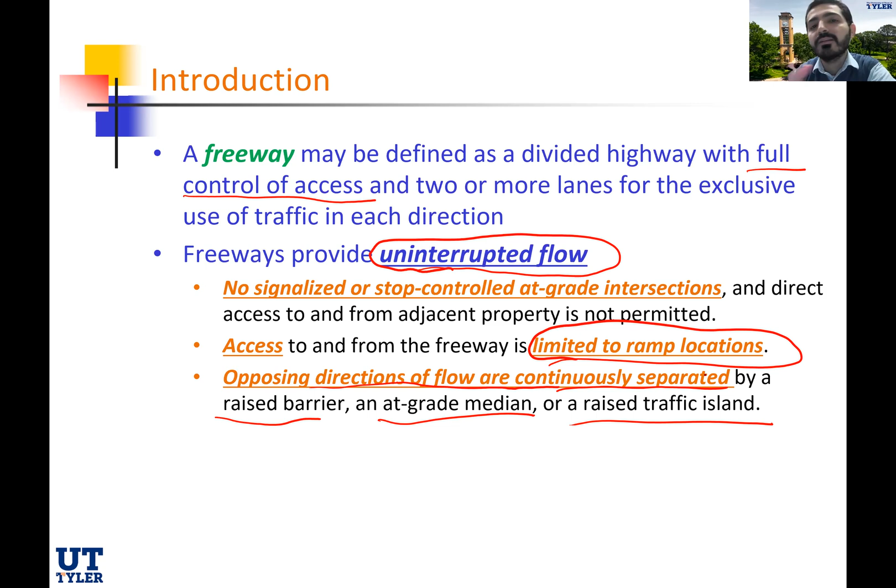The access to and from the freeway is limited to the ramp locations, as well as the opposing directions of flow being continuously separated by either a raised barrier, an at-grade median, or a raised traffic island. So if you are driving on that freeway, you do not care by any means what's going on the other side - there is a big physical barrier between the opposite directions, and that's how we define a freeway.

So operating conditions on freeways are actually dependent heavily on characteristics of the roadway as well as the interactions between the vehicles within the traffic. It doesn't depend on the traffic control - there are no traffic signs, no traffic signals, no stop signs, no yield signs. The main operations and the quality of the operation on freeways highly depend on the characteristics of the roadway itself, how good the roadway is, and also the interaction between the vehicles on that freeway.

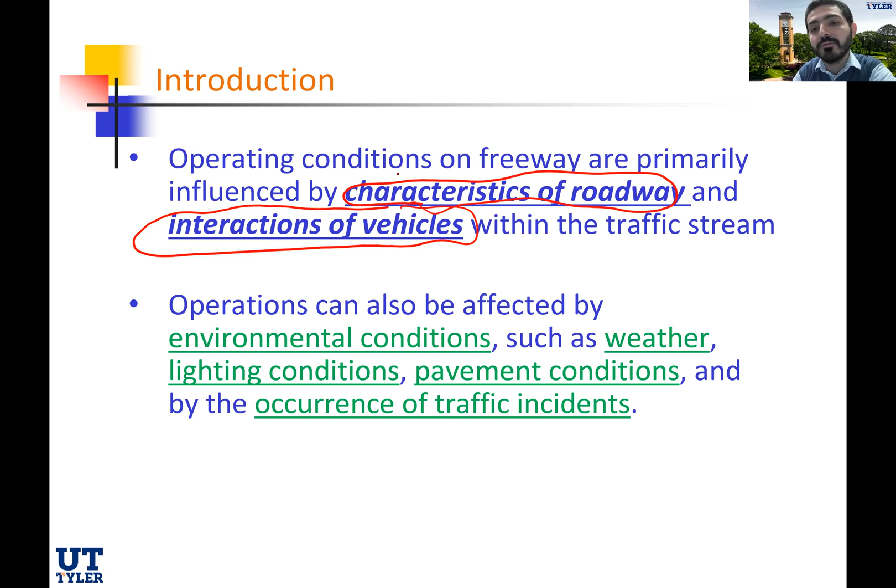So operations can be affected by environmental conditions - if it's an icy condition, snowy condition, rainy condition, windy condition, that also can make a big impact on operations, such as weather or even lighting conditions. Sometimes driving at night on a freeway, your experience is going to differ if there's enough lighting or not, and therefore the level of service eventually on this freeway will change and will be highly affected by changing the lighting conditions.

Also, pavement conditions - the pavement itself, the surface. Is that surface of the pavement a rough surface or a smooth one? If there are lots of cracks, lots of rutting, lots of distresses, that's also going to affect what's the level of service on this freeway. And of course, the occurrence of traffic accidents, or to be more generalized, any incident that happens. If we have lots of incidents that happen on this segment, known to be highly dangerous, then the level of service also will go down.

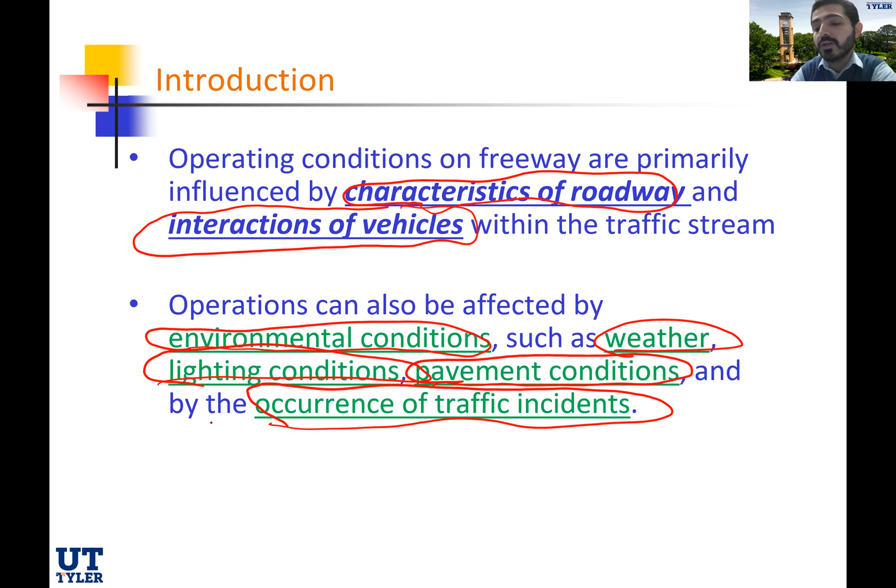So speaking of a freeway, any freeway actually consists of three component parts. The first part is what we're going to call the basic freeway segment, and then we're going to have weaving areas, and then we have the merge or diverge areas.

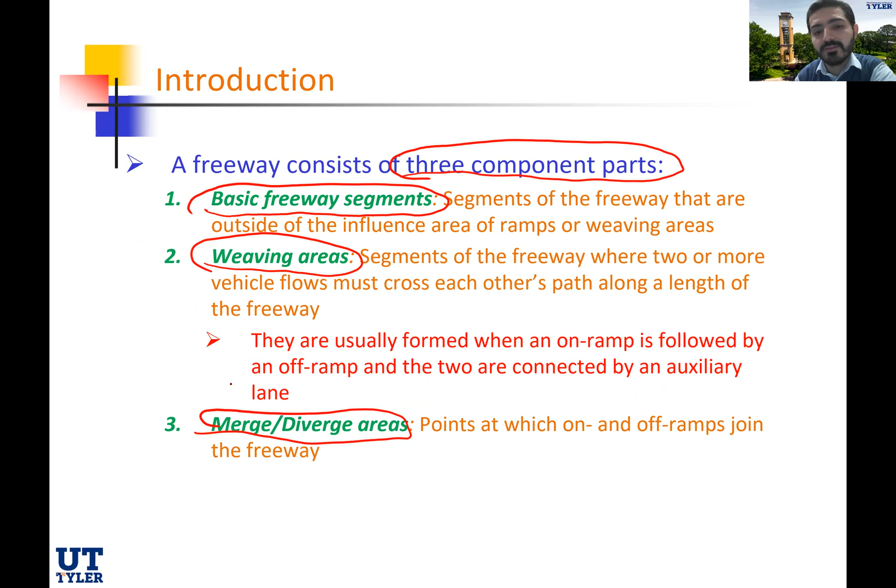It's a continuous stretch with no interruptions, except if there is an incident that happens. So this is the basic freeway segment. By definition, these are segments of the freeway that are outside the influence area of ramps as well as weaving areas.

The weaving areas are the segments of the freeway where two or more vehicle flows must cross each other's path along the length of that freeway. These are usually formed where an on ramp is followed by an off ramp. If the on and off ramp are very close, you're going to see vehicles trying to enter and trying to exit the highway, versus others trying to speed up to enter the highway, so we get a conflict of interest.

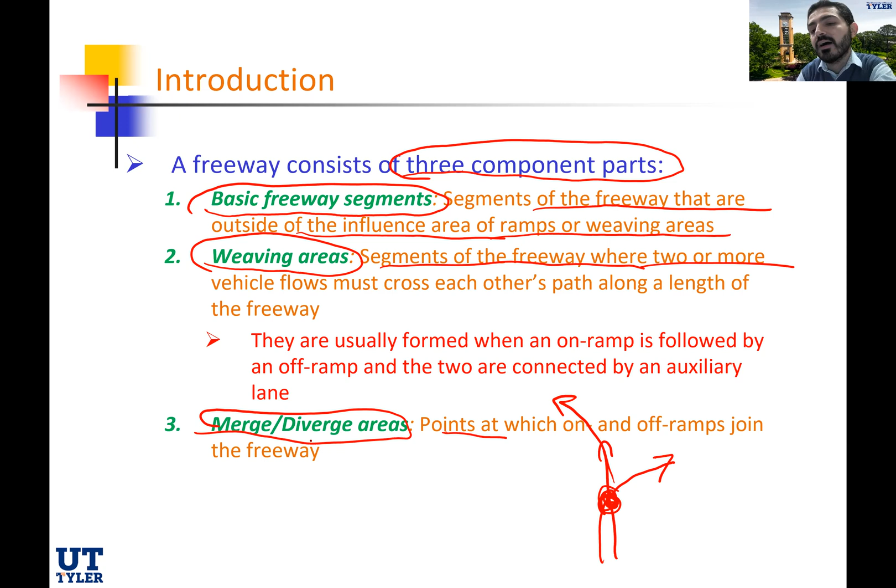Some vehicles are trying to get in, and some are trying to get out, and that is one of the most dangerous locations in any freeway, the merge or diverge. These are the points at which on and off ramps join the freeway. So those are the three major segments of any freeway.

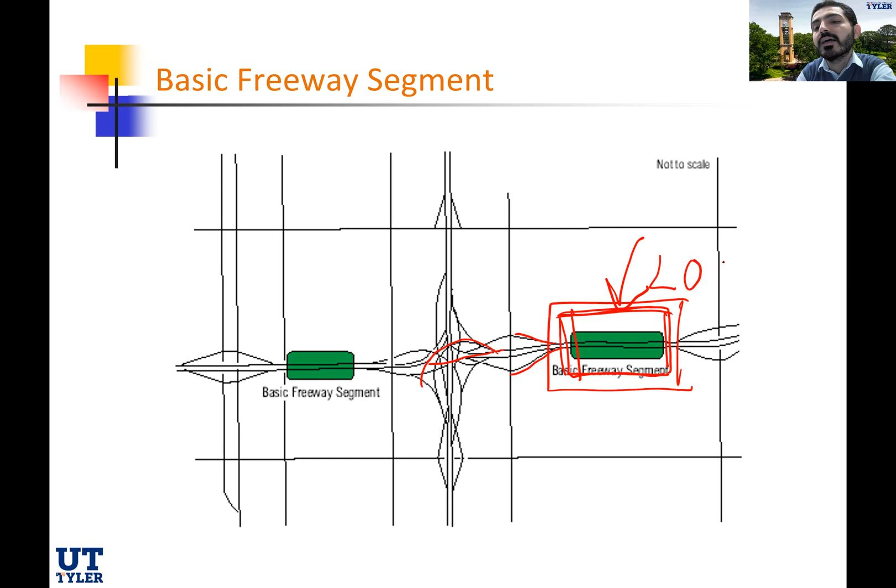You may agree or disagree, but to be fair, when determining the level of service for any freeway and comparing different freeways, we tend to pick the basic freeway segment to judge the true level of service for this freeway. A basic freeway segment is typically characterized by three main performance measures, which we look into once we pick that segment.

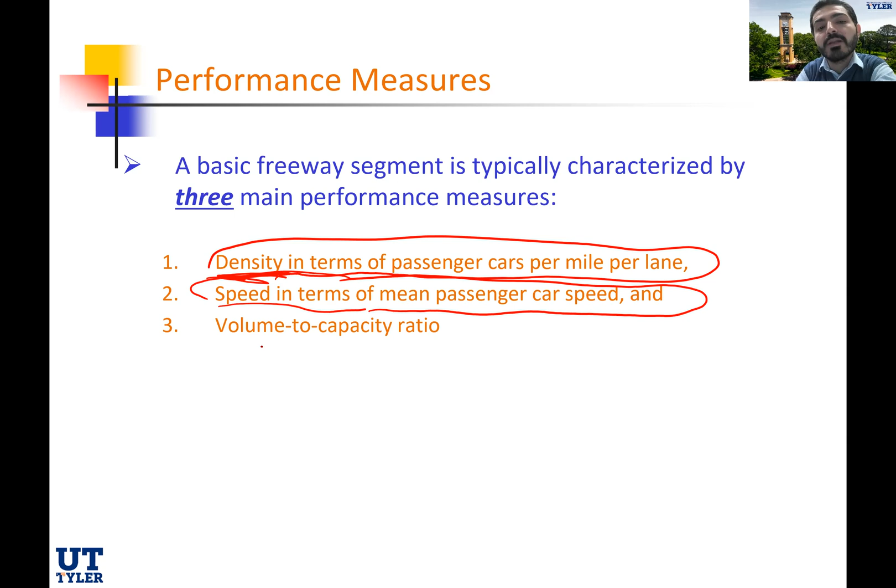One of them is density, which we defined in the previous chapter, in terms of passenger cars per mile per lane. Then there's also speed, in terms of mean passenger car speed, as well as the volume to capacity ratio.

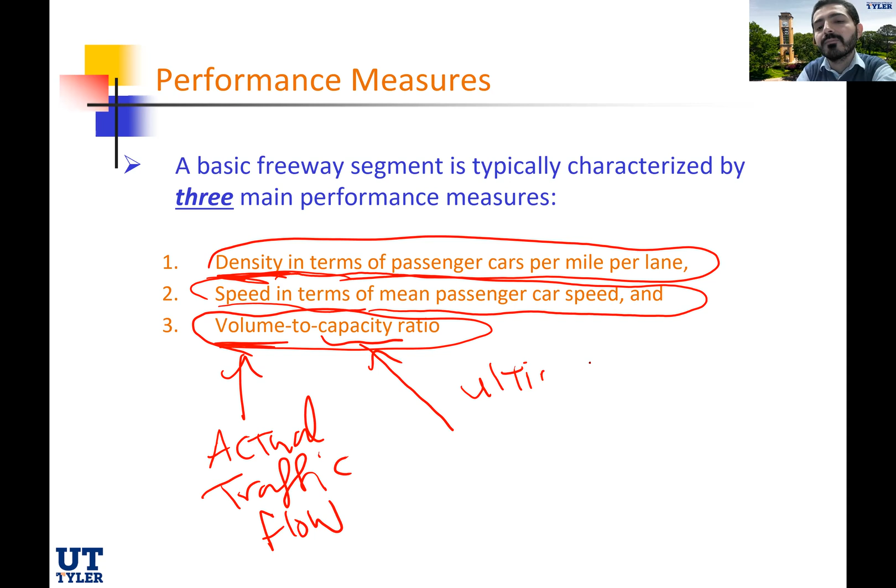Volume to capacity ratio is similar to how far we are from the ultimate strength of a steel sample, for example. The volume is the actual traffic flow, whereas the capacity is the ultimate traffic capacity or the ultimate traffic flow possible.

So let's start from the very beginning. Density: if I'm driving on a freeway and the density is high, the level of service will go down. If the density is low, that means there's not much passenger cars per mile per lane, and the level of service, your experience as a driver, is going to be way better.

Speed also matters, and we define something called FFS, free flow speed. If your free flow speed is high, the level of service will be high, an A or a B. But if the free flow speed is significantly low, because it's affected by other factors, then the level of service, your rideability on the freeway, will be low.

Same thing with the third item, volume to capacity ratio. If you can handle, let's say, 2,000 vehicles per hour per lane, that is the capacity. If the real volume is 1,000, then the ratio is 1,000 over 2,000, that's 50%, which is great. But if the actual traffic flow is 1,900, then 1,900 over 2,000 is 0.95, or 95%, so now we're reaching the capacity.

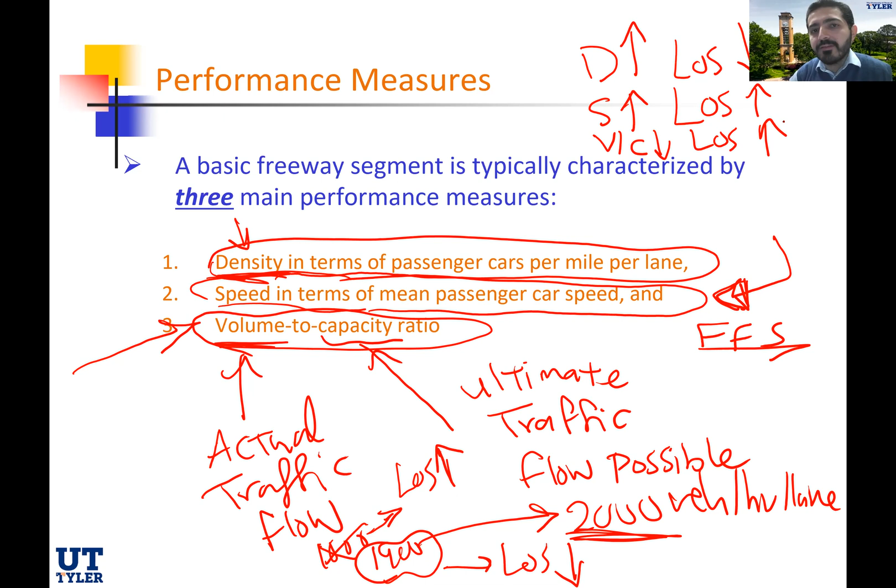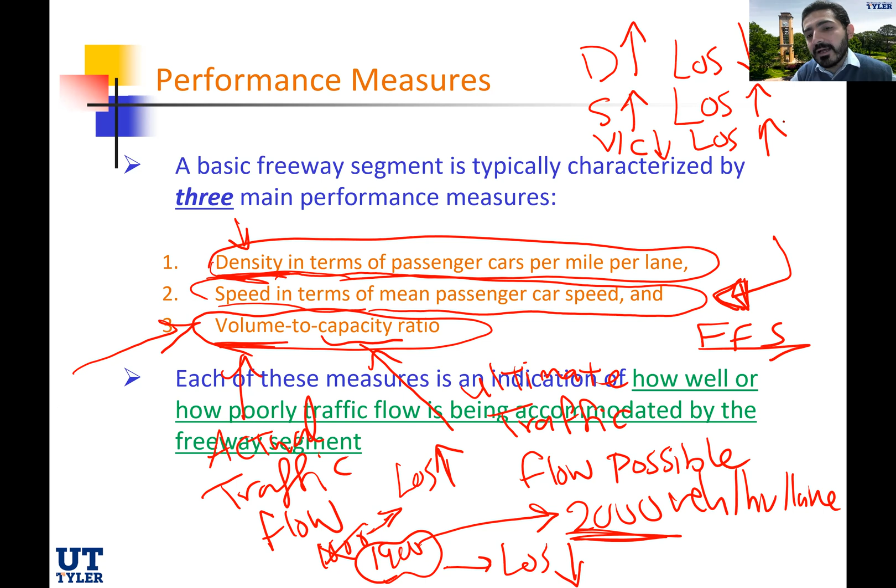Let's get into more details on how we can get the actual level of service for any freeway we're interested to analyze. Each one of these measures is an indication of how well or how poorly the traffic flow is being accommodated by the freeway segment.

So this is the service measure - how are we going to measure the level of service? You may think that if the traffic speed on a freeway segment is high, the level of service is going to be high. I'd tend to agree - it's a major indicator of the quality of driving at that location. But there are other factors that affect level of service, such as the freedom to maneuver within the traffic stream and proximity to other vehicles.

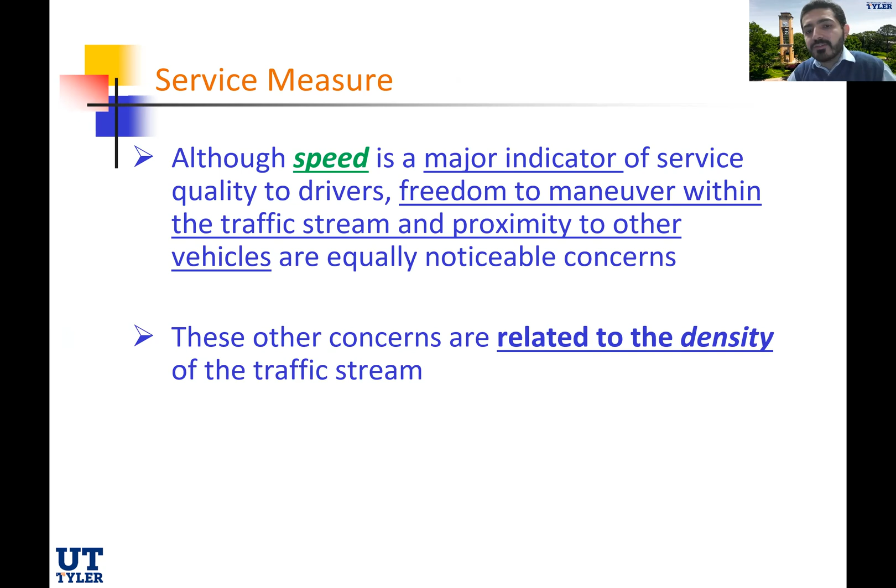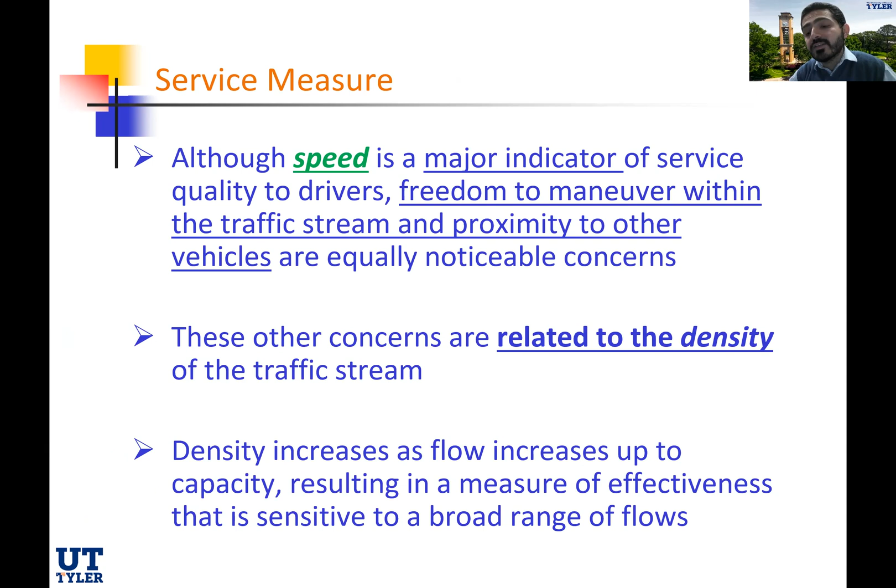These other concerns are related to the density of the traffic stream. The density increases as the flow increases up to capacity, as we've seen in chapter 5, resulting in a measure of effectiveness that is sensitive to a broad range of different flows. So for all of these reasons, density is the main performance measure used to define the level of service for a basic freeway segment.

If I have a density of 11 or less passenger cars per mile per lane, the level of service will be A. If the density is somewhere between 11 and 18, which is higher, the level of service would be B. If I have, say, 35 to 40 passenger cars per mile per lane, that's level of service E. And if it's more than 45, this is a big troubled freeway segment with level of service F, and some attention needs to be drawn at this location.

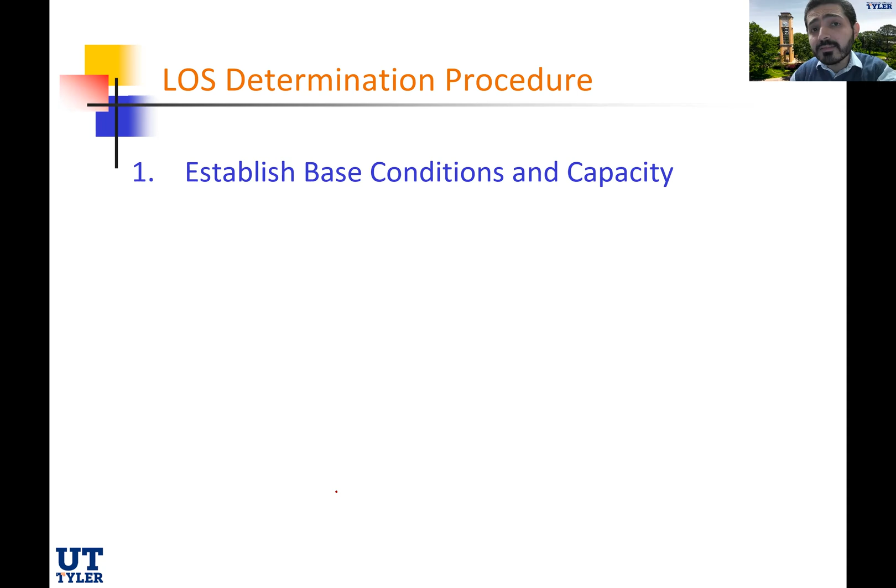So what is the mathematical procedure to determine the level of service? First, we need to establish base conditions and capacity. Instead of going straight through the calculation, we define some base or ideal conditions. If these are found on any freeway, the level of service is already predetermined as level of service A, or grade A. If not, if any of these conditions are not met, then you've got to go through the calculations.

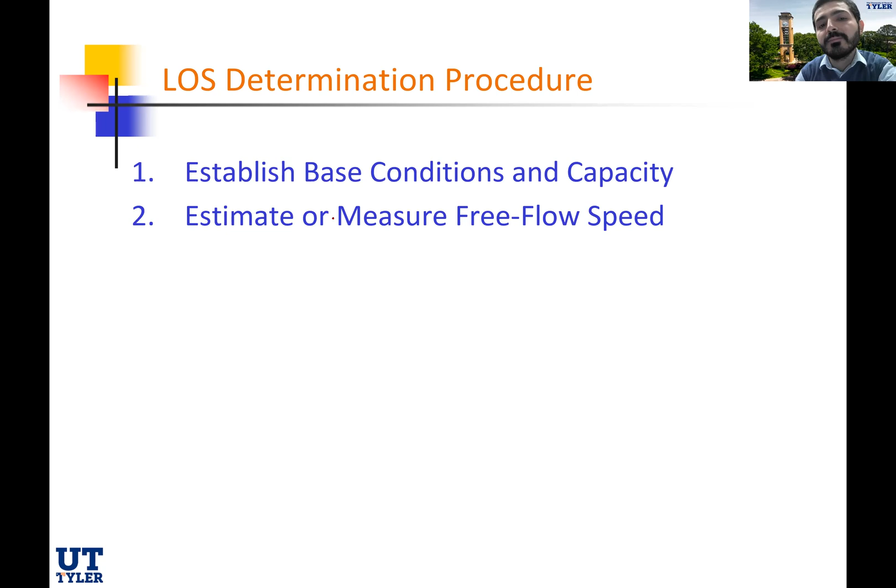The calculations include estimating or measuring the free flow speed, FFS, and measuring the flow rate, or what we call the analysis flow rate. So if you get the flow and the speed, you'll be able to get the density, and from there you'll be able to determine the level of service.

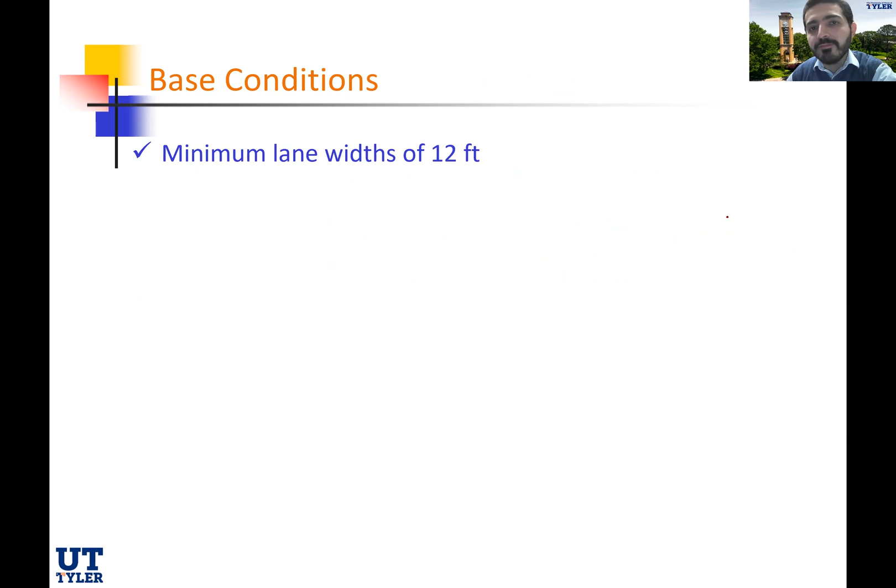So, what are these base conditions? If you were to design a freeway with level of service A, what would you expect to see? The first condition is we need a minimum lane width of 12 feet - any lane on the freeway has to be at least 12 feet in order to consider it level of service A.

Next is the minimum right shoulder lateral clearance between the edge of the travel lane and the nearest obstacle or object influencing traffic behavior, which should be at least 6 feet. Let's draw one direction, assuming there's a physical barrier between the two directions, so I have two lanes here. The first condition is I have to have a minimum of 12 feet. Then between the edge of the travel lane all the way to the next obstacle, which is the shoulder, minimum at least 6 feet. If I have 6 feet or higher, this is awesome - I'm meeting the level of service A condition.

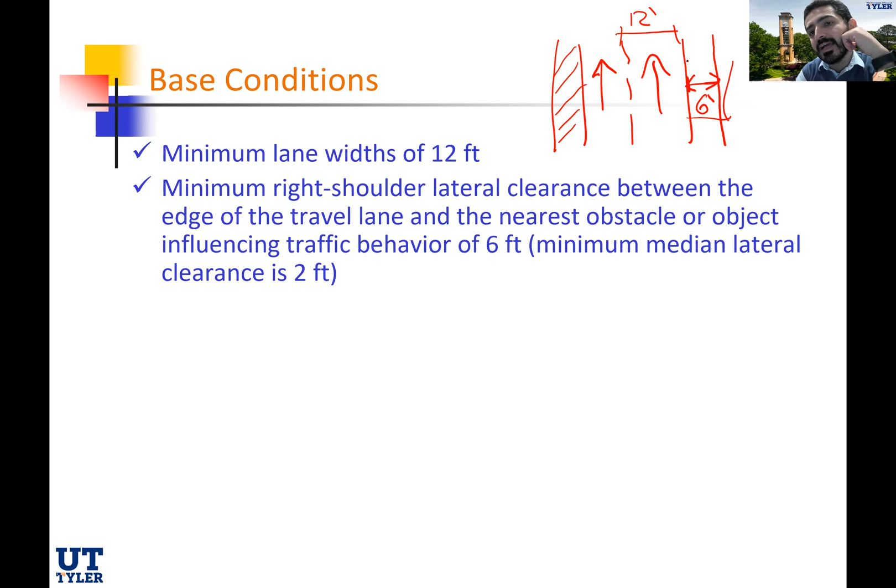We also have to have a minimum median lateral clearance of 2 feet. But typically we don't care about the median because, by definition, freeways have wide medians. So the main concentration is really, do I have a right shoulder width of a minimum of 6 feet or not? Also, I have to have a traffic stream consisting of passenger cars only. I know this is too ideal, but this is how we define level of service A - if almost 100% of the vehicles driving on this freeway segment are only passenger cars, no big trucks, no 18-wheelers.

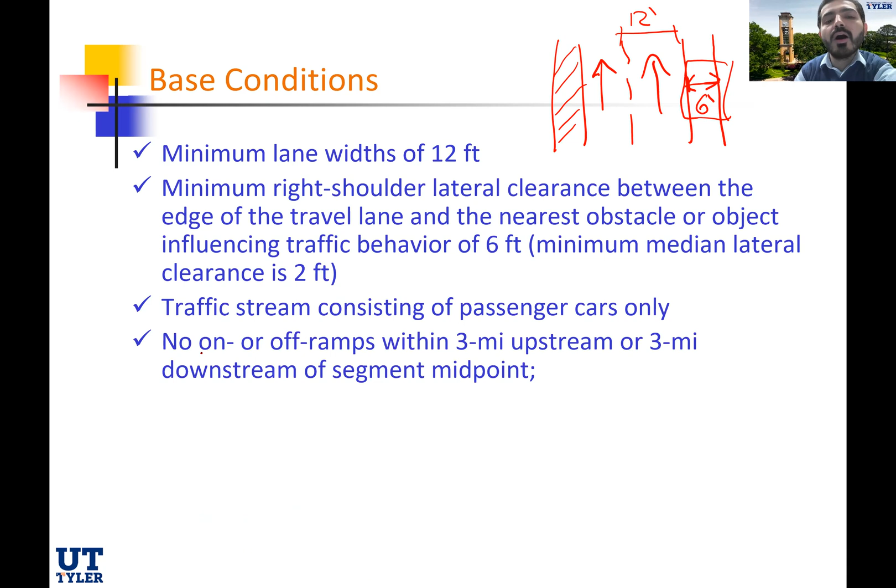If that's the case, we're still continuing with the assumption that the level of service is A. Next, there should be no on and off ramps within 3 miles upstream or 3 miles downstream of a segment midpoint. If we have too many on and off ramps, more than 6 total between upstream and downstream, then we're deviating from level of service A. The lesser the ramps, the more continuous the flow, your driving experience will be much better, and therefore the level of service will be A.

We also have to have level terrain with grades not greater than 2%. So you're not really climbing - I'm talking now about the vertical alignments, the G, remember when we did the crest vertical curves or sag vertical curves. The maximum should be 2%, either going up or going down. If it's more than 2%, your speed is going to start being significantly lower just because you're climbing, and therefore the level of service is going to deviate from level of service A.

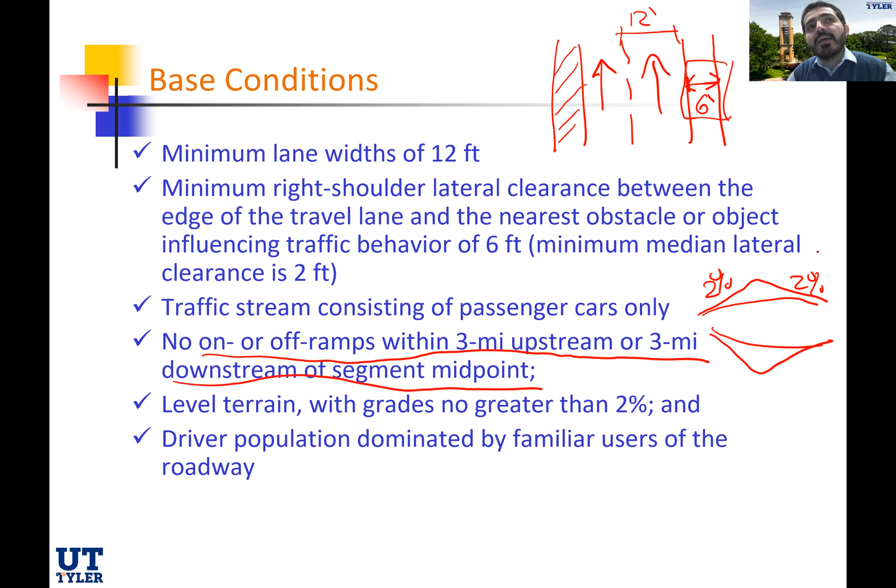Next is driver population dominated by familiar users of the roadway. That means you're hoping that 95% of the drivers on that freeway are using it on a daily basis and are fully aware of any horizontal or vertical alignment changes, and therefore they won't have a significant drop in speed at certain points that may affect the level of service.

However, on the other extreme case, if this freeway leads to a national park and 50% or more of the people using it are first-time users, they are more curious and more cautious. They don't know the bends of the roadway, so their speed is going to be lower, and therefore you'd expect the level of service to be lower just because there are lots of first-time visitors using this freeway, which lowers their speed and therefore the level of service.

So in theory, if you satisfy all these conditions - wide lanes at least 12 feet, wide shoulder minimum 6 feet, traffic only about passenger cars with no trucks lowering overall speed, a low amount of on and off ramps, vertical alignments of maximum 2% ups or downs, and most vehicle drivers familiar with the roadway - then satisfying all of them leads to level of service A. If you do not satisfy any of these conditions, you have to go through the calculations, and you know you are not going to be at level of service A.

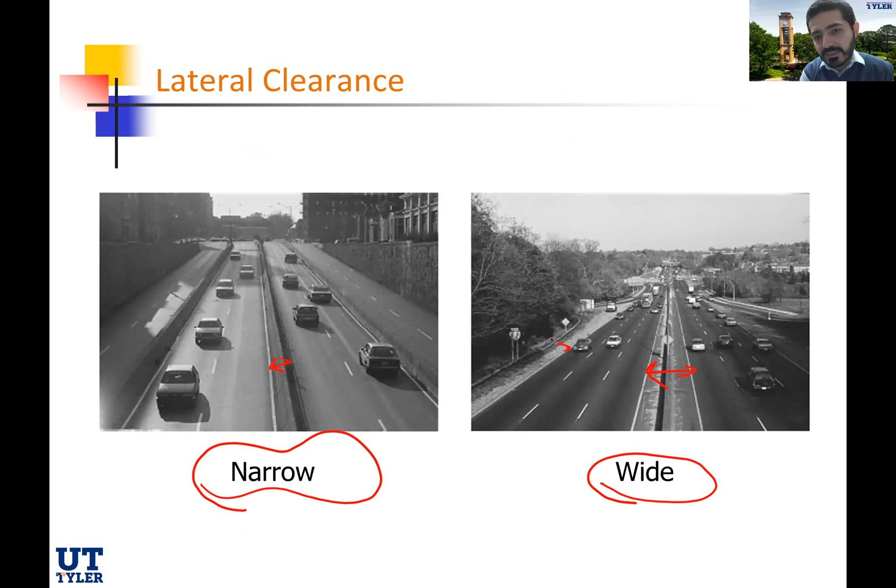So assuming that you're not going to have level of service A, here's an idea of the lateral clearance I was telling you about. This is a wide lateral clearance versus a very narrow lateral clearance. Even between opposite directions, this is very narrow, and here there is a distance versus here barely not much.

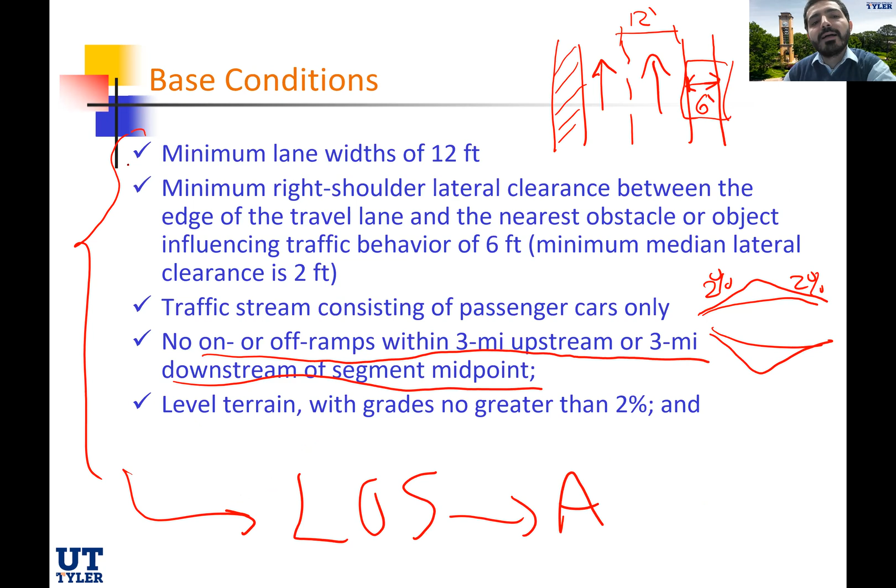Okay, going back to here, we said these are the steps. First, I need to check the base condition. Let's assume you did not meet the base condition. Then you need to go through the three other steps, steps 2, 3, and 4, to calculate the level of service. The first step, number 2, is we need to estimate or measure the free flow speed.

So how can we do that? This is what we're about to say. So the free flow speed, let's first redefine it. The free flow speed is actually the mean speed or average speed of passenger cars measured under low or moderate flow rates.

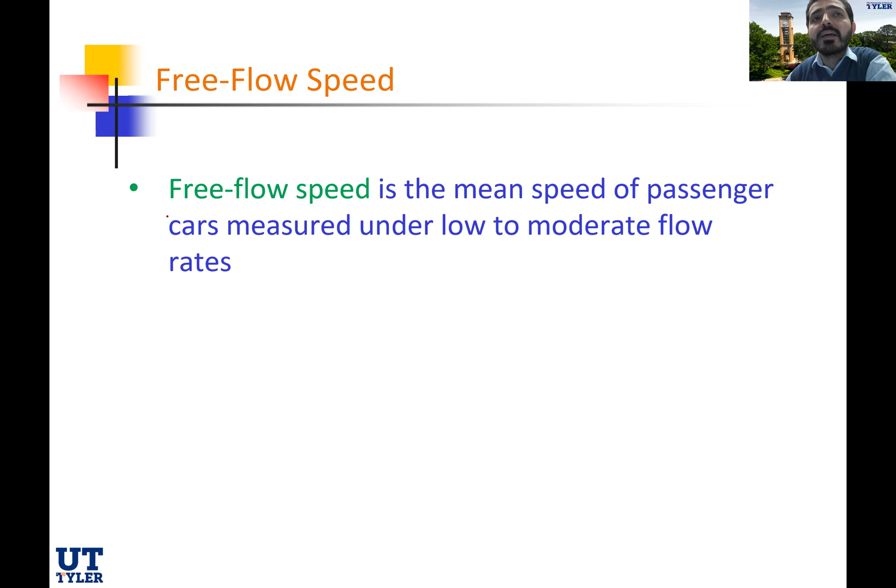So the interest here is if there are almost no cars or a very minimal amount of cars, and the vehicle drivers are picking their own speed, what would that free flow speed be? So to measure it, there are two methods that can be used to determine the FFS.

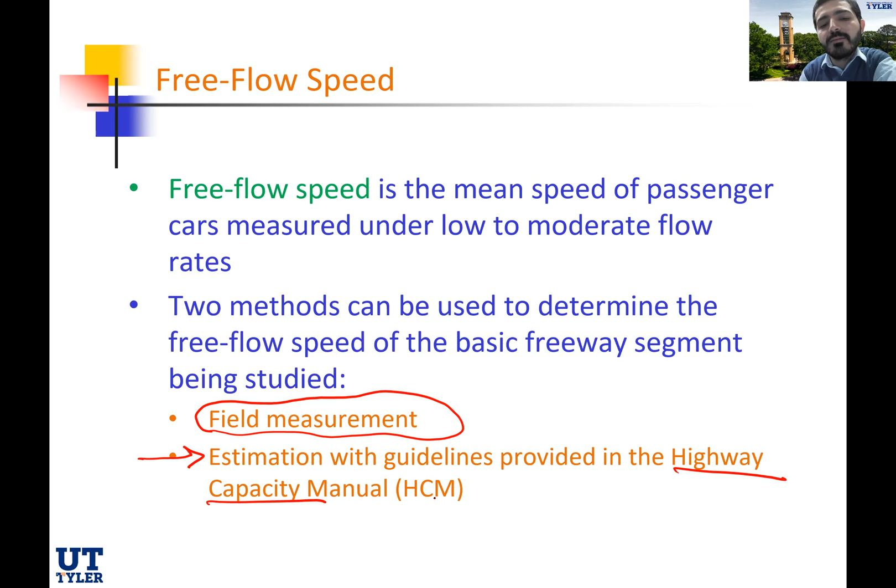We can do field measurements, or we can estimate it using the Highway Capacity Manual, HCM. Please pay attention to that, sometimes they ask about it in the second exam. What's HCM? It's a Federal Highway Administration publication called the Highway Capacity Manual, that gives us the tool to estimate the free flow speed if we do not have what it takes to measure that free flow speed in the field.

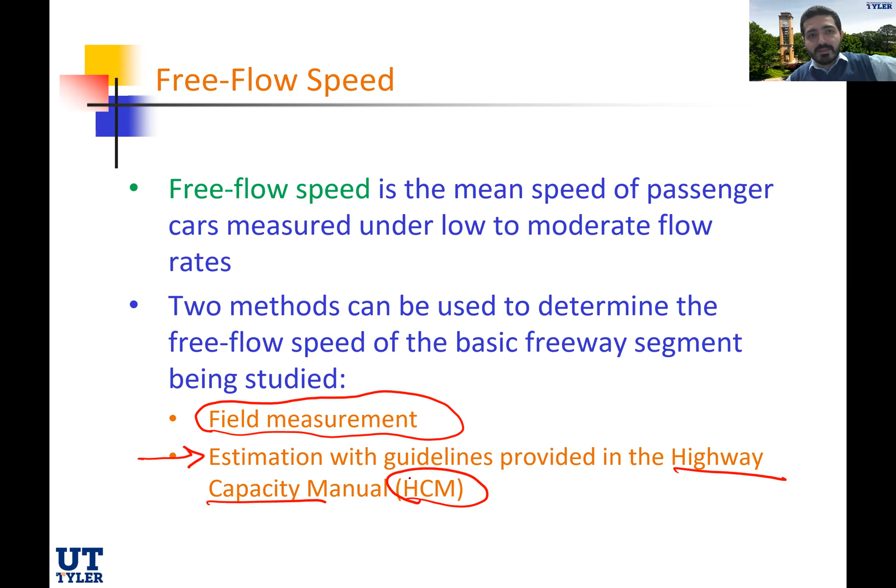So how can we estimate it? Again, measuring it is easy. You're just gonna go there and measure. You're gonna sit there maybe for a certain amount of time, observe a certain number of vehicles, sum them up, divide them, and get the average speed, and that will be your free flow speed.

But if you want to estimate it, this is the equation to estimate the free flow speed. It's a very theoretical equation, that's why it will be provided to you in the exam if you need it. Basically, let's take a look at how to estimate it. The free flow speed is mainly 75.4 miles per hour, minus a couple of factors here, and we want to study these factors.

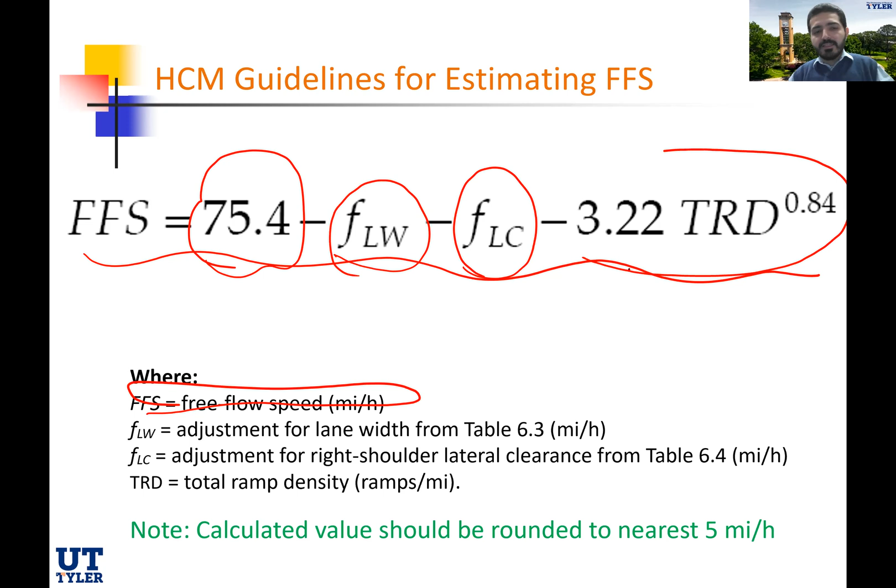The first one is FLW, this is an adjustment for lane width. This gives you an idea that once we start deviating from the base condition, if I have now a 12 feet or less than 12 feet worth of lane width, then I would start to deviate from the original free flow speed. As you could tell, all of these factors involve a subtraction. Why is that? Because this is actually the ideal free flow speed on any freeway, 75.4 miles per hour.

But if I am now deviating by changing the lane widths, or FLC, which is the adjustment of the right shoulder, if the right shoulder is less than 6 feet, or TRD, which has to do with the number of ramps, if the number of ramps is more repetitive, more than 6 per mile, then we're gonna be continually subtracting from that 75.4 miles per hour. So let's study first the FLW.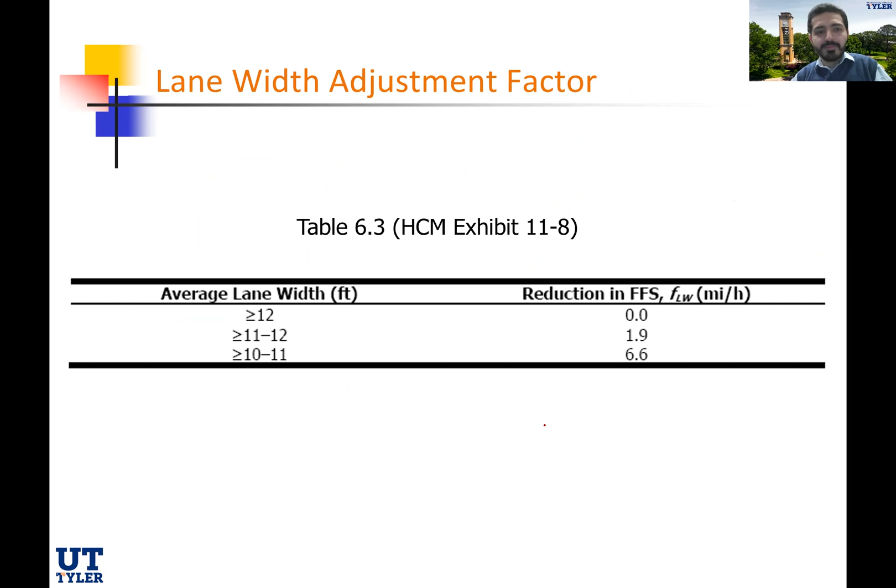FLW, again, this is the adjustment for lane width. Let's go to table 6.3. Very simple, and it highly depends on the average lane width. The average lane width, if it's more than or equal to 12 feet, take a look at this here.

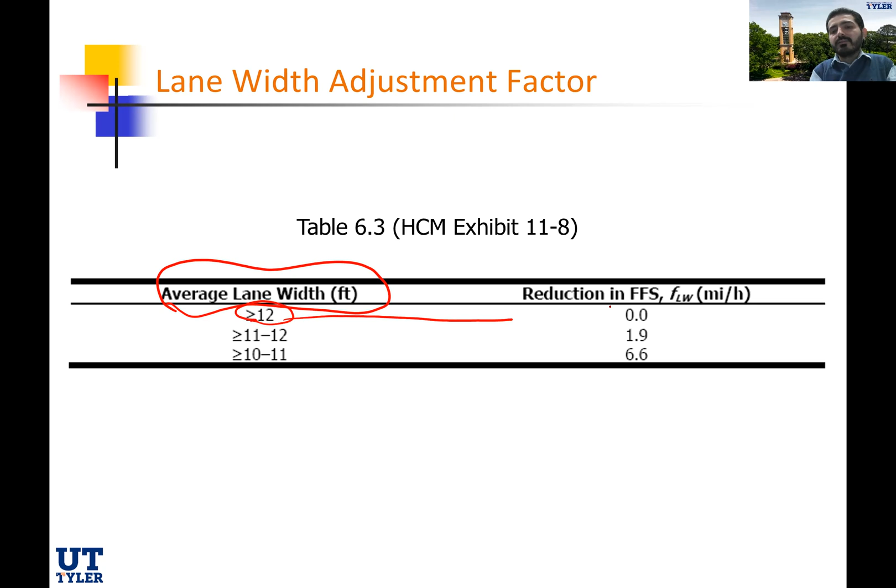Very interesting, what's the reduction? What's FLW? FLW is nothing but a reduction of the free flow speed. So if the lane width of any freeway is 12 feet or more, there is no reduction, because you are at the base condition or ideal condition of a freeway, so that is 0. But if the average lane width is somewhere between 11 to 12, the reduction FLW will be 1.9.

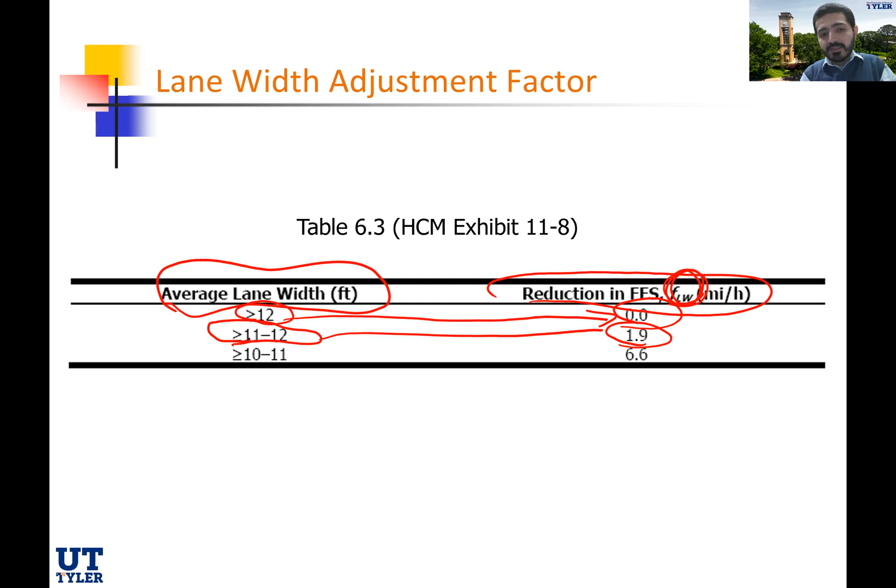Whereas if the average lane width now is somewhere between 10 and 11, the FLW will significantly go up to 6.6 miles per hour. What does that mean? That means, assume that the FFS is equal to 75.4 minus FLW.

If I am driving on a freeway that the width is 12, then that FLW is going to be 0, and therefore there is no correction when it comes to lane width. But if that 12 feet now is becoming 11 feet, then it's 75.4 minus 1.9. Or if the width now of a freeway is 10 feet, then the FFS is going to be 75.4 minus 6.6 miles per hour.

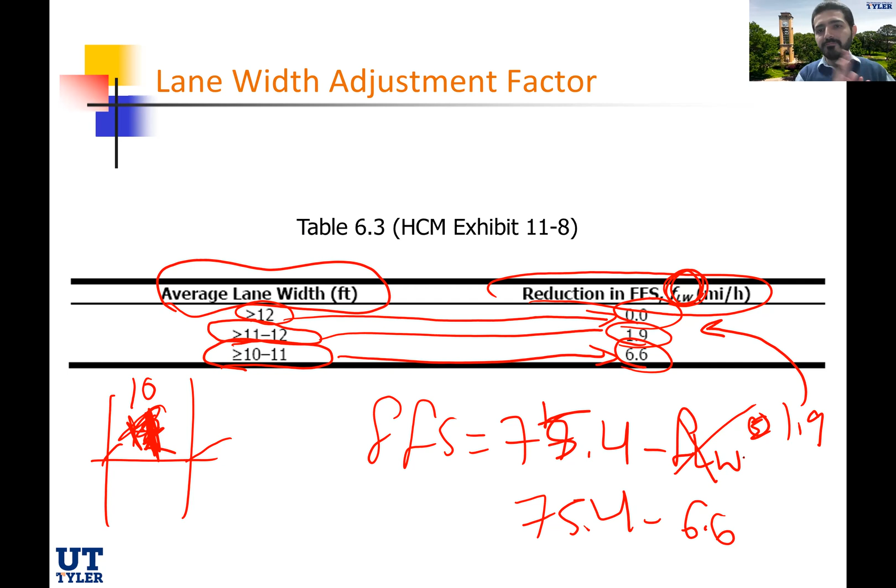So a huge difference and a huge jump, just by reducing a foot from the lane width. Basically, as a driver, if you drive on narrow roadways, what's going to happen? By instinct, you're going to start reducing your speed. You're going to feel that you're not really comfortable, this is too narrow, I may end up interacting laterally with the vehicle beside me, and therefore your free flow speed will get reduced naturally.

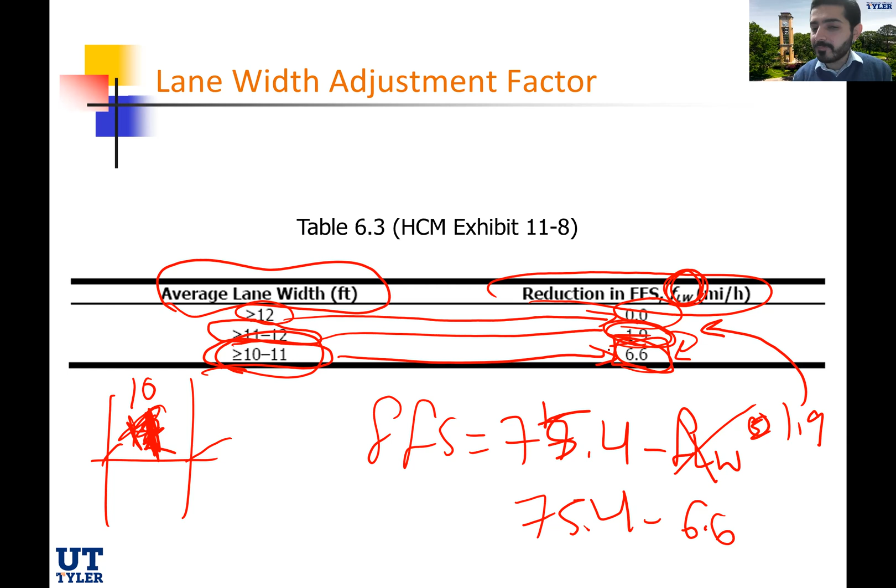But what's interesting here is the reduction from 11 to 12. If you just reduce the lane width by 1 foot, the free flow speed reduces by 1.9. But if you're reducing by 2 feet, you'd think it's linear, but that's not the case. Once it's really narrow, 10 feet instead of 12, now you're reducing your speed by 6.6 miles per hour. All right, so we got the FLW.

How about now the FLC? FLC has to do with the width of the shoulder, and that's why we go to table 6.4 instead of 6.3. Here we go, 6.4 — the first thing to get into the table is, what is the right shoulder lateral clearance? What's the width of the right shoulder?

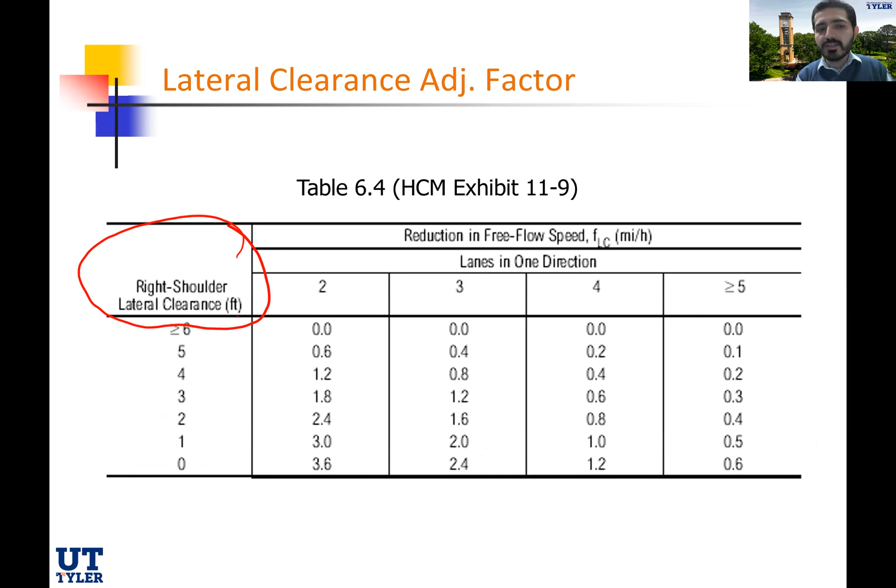And then the other factor that's going to get us to one of these four columns is the number of lanes in one direction. A big factor here is how many lanes per direction. If I have a shoulder or lateral clearance from the right side at 6 feet, regardless of how many lanes per direction, that's actually a good width on the right side of the freeway.

That's going to give drivers the comfort to drive at their free flow speed, and therefore the free flow speed will not be affected by that width if it's 6 feet or more. Therefore, the FLC will be equal to 0 in this case.

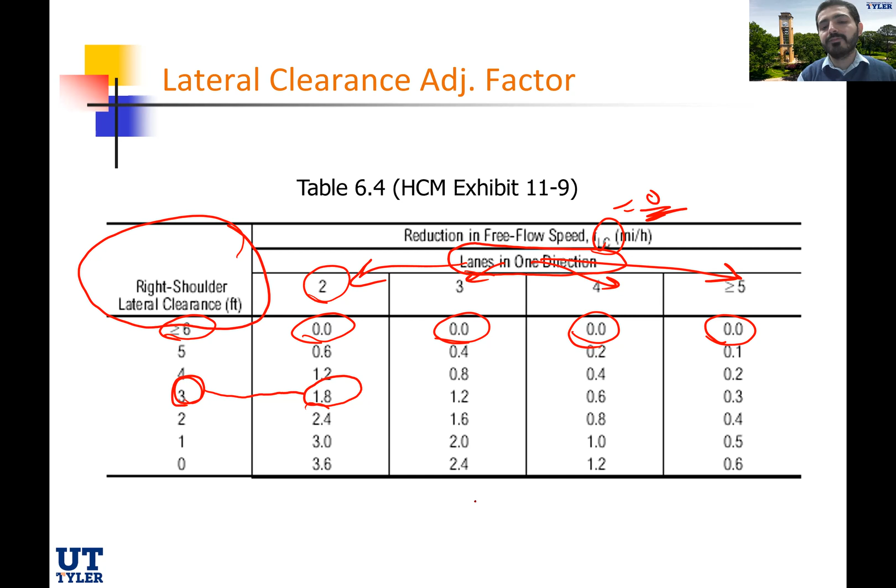But what happens now if the shoulder or lateral clearance on the right shoulder starts to get lower and lower? Let's say now instead of 6, I only have 3 feet. If I only have 3 feet on the right side of the freeway as a shoulder, the free flow speed will get reduced by 1.8 miles per hour if I only have 2 lanes per direction.

But what if I have 3 lanes, or 4 lanes, or even 5 lanes? If I have 5 lanes instead of 2, and I have the same 3 feet shoulder, the reduction will be less, because now there are lots of lanes and much less of the driver population is going to be affected by that narrow shoulder. Therefore the reduction is going to be barely 0.3 instead of 1.8.

The worst case scenario, as you could tell, is actually to have 0 lateral clearance and only 2 lanes. That's going to have the highest reduction in free flow speed, 3.6 miles. It's not as bad if I have zero lateral clearance but 5 lanes or more in each direction — then the reduction will be only 0.6 miles.

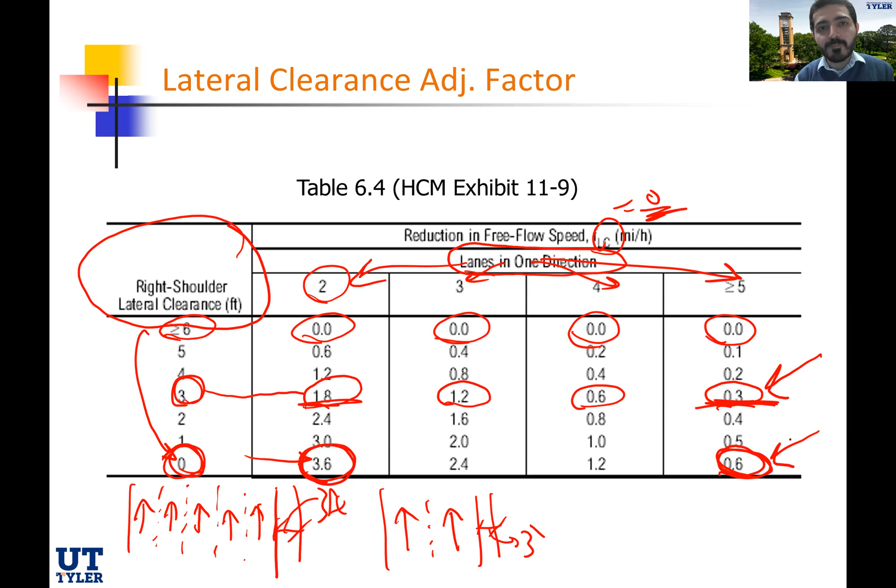All right, so now we got the FLW, we got the FLC. The last thing is the TRD. How am I going to calculate that TRD and then raise it to the power 0.84 times 3.22?

The equation is very simple. The TRD is the number of on and off ramps, 3 miles upstream and 3 miles downstream of a segment midpoint, divided by 6 miles. So really the TRD is the number of ramps over 6.

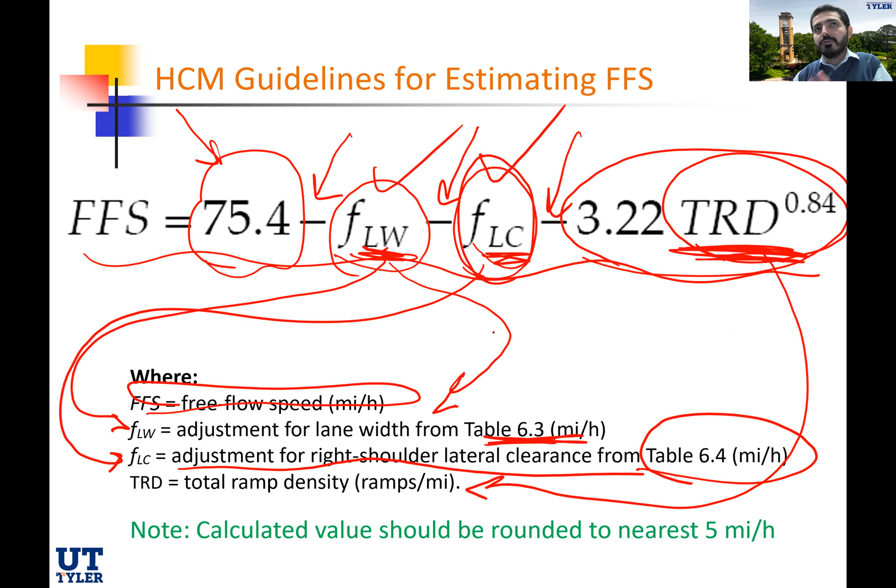Once you have that, you plug it into the equation and you get the FFS. So FFS is 75.4 miles per hour minus FLW from table 6.3, minus FLC from table 6.4, minus 3.22 times the TRD, which is the number of ramps over 6, to the power 0.84.

All right, so going back to the steps one more time. I got the FFS as a second step. Now I need to get the analysis flow rate.

What is the flow? If I get the speed and the flow, what can we get? We can get the density. And again, for density we can use that little table or another graph that I'm going to show you towards the end of the lecture.

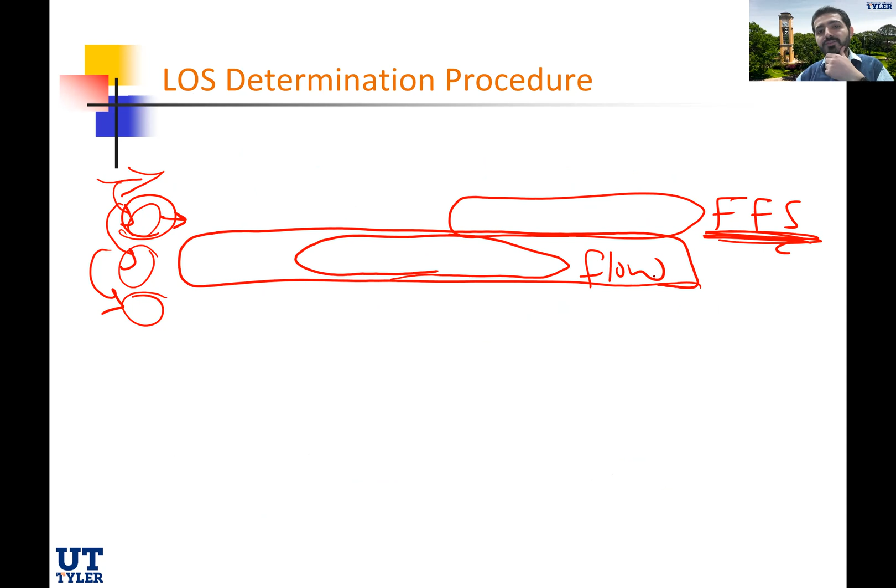I'm interested now to get the flow, and specifically to get the worst. That's the 15-minute passenger car equivalent flow rate. How can we get this?

We get it by capital V, that's the volume, the hourly volume. We're going to learn this more in the next semester class, which is 4351. We're going to learn even to measure it in the field. The hourly volume is actually measured by going to the field and staying there for an hour with a micro tally, equipment, or a camera, and measuring how many vehicles per hour went through a certain point.

That's the V. Then N, this is the number of lanes per direction. And by the way, I didn't mention it earlier, but the level of service for freeways is actually calculated per direction. You may have a freeway that has a northbound or southbound, or an eastbound and westbound, and the level of service can be totally different.

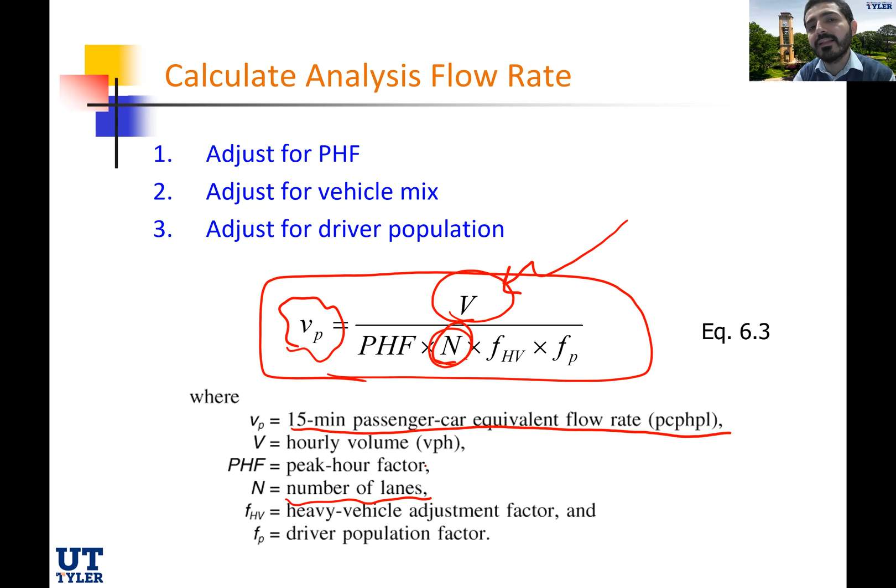So for example, if I live in Tyler, Texas, and I want to travel to Dallas, Texas, I'll be driving on I-20. That I-20 has two directions. Going from Tyler to Dallas, I may have a level of service B, while going from Dallas to Tyler, I may have another level of service, B or C.

So that's why here the N is the number of lanes per direction. Level of service for freeways is always going to be one level of service per direction. Whereas for the next couple lectures where we talk about two-lane highways, it's just one level of service, because there's lots of interaction between the two directions since there isn't much of a median. So the experience of a driver in one direction is going to be highly affected by the other direction. But here, the N is the number of lanes per direction.

FHV, this is the heavy vehicle adjustment factor. As I told you, one of the conditions for level of service A, the base condition, is to have zero trucks. But if I have trucks, then that's why I'm going through the calculation, and having trucks is going to affect overall the 15-minute passenger car equivalent flow rate.

And then FP, this is the other deviation from the base condition, which is the driver population factor. How popular, or how comfortable the drivers are and how aware they are of this freeway. If the majority are familiar with it, then this FP is going to approach 1. If not, we're going to lower that value. Times PHF, the peak hour factor.

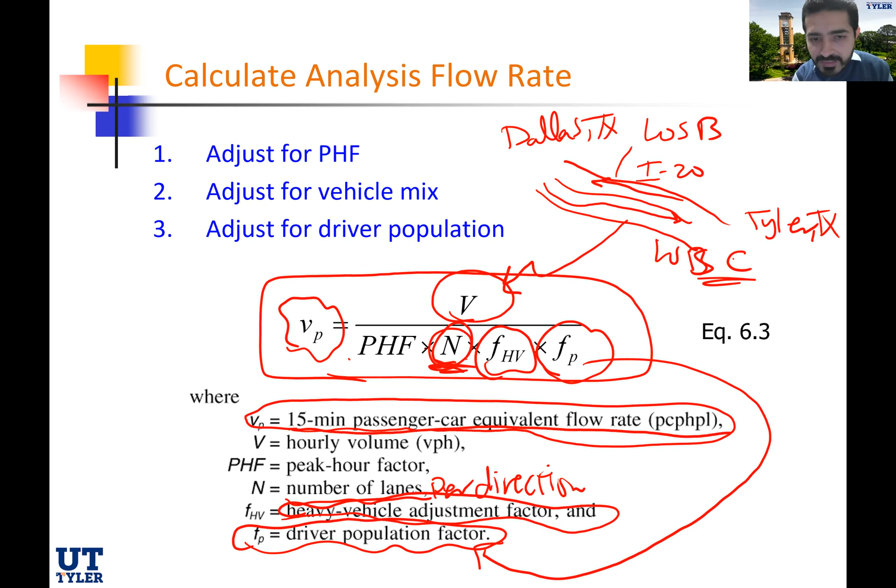That is a new concept for every one of you here, to introduce.

The peak hour factor. I'm interested to get the peak hour factor. What is the peak hour factor? It's actually a number that can tell us within the worst peak hour of the day, how bad is that hour. Let me draw this for you here.

So let's talk first about the concept of peak hour. In the city of Tyler, we have three typical peak hours: one in the morning, a small peak in the lunch hour, and another big one at the PM peak hour. The AM peak hour typically happens from 7:30 till 8:30 in the morning.

This is time, and this is volume. The other peak is again somewhere between 11:30 till 12:30, and the PM peak hour is from 4:30 till 5:30. It can deviate plus or minus 15 to 30 minutes, but those are the peak hours.

The peak hour factor. Now we know that this hour is really bad, I get it. But now we want to know, using this factor, is the traffic within this hour really bad? Is the traffic uniform within this peak hour, or do I really have a bad 15 minutes within this hour, which is more problematic? So that's what leads us to the definition of this factor.

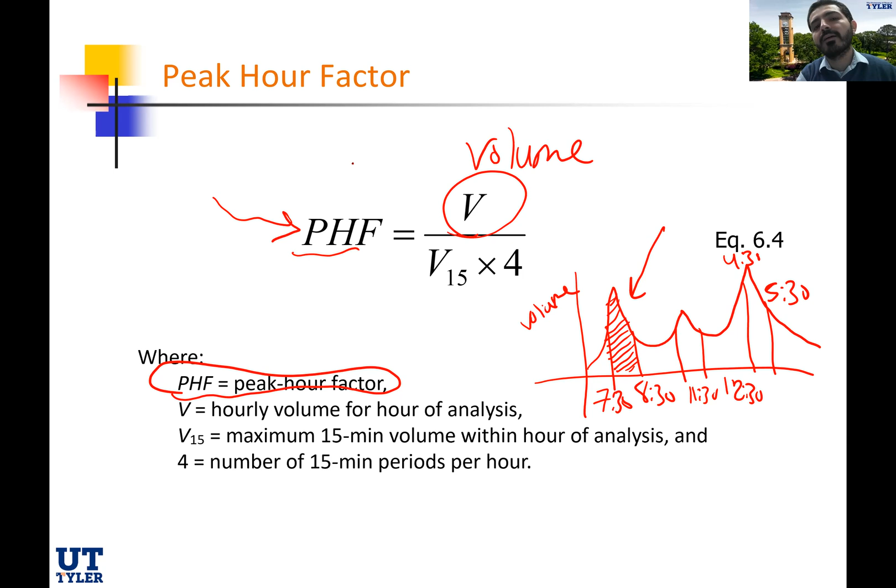The peak hour factor is actually the hourly volume, capital V, over V15 times 4. V15 is the maximum 15-minute volume within the hour of analysis. Within the hour of analysis, we pick the worst 15 minutes.

Let me give you a small example so you understand what can be a high peak hour factor and what can be a low peak hour factor, and which one we would desire on our facilities. If I have this as the time, typically when we measure the hourly volume, we measure traffic every 15 minutes: from 7:30 till 7:45, 7:45 till 8, 8 till 8:15, and 8:15 till 8:30.

One of the best case conditions is if I observe 250 vehicles in the first 15 minutes, 250 in the second, 250 and 250 - every 15 minutes is exactly the same. So if I look into this, trying to calculate the peak hour factor, it would be equal to the total volume of that hour, which is 1,000.

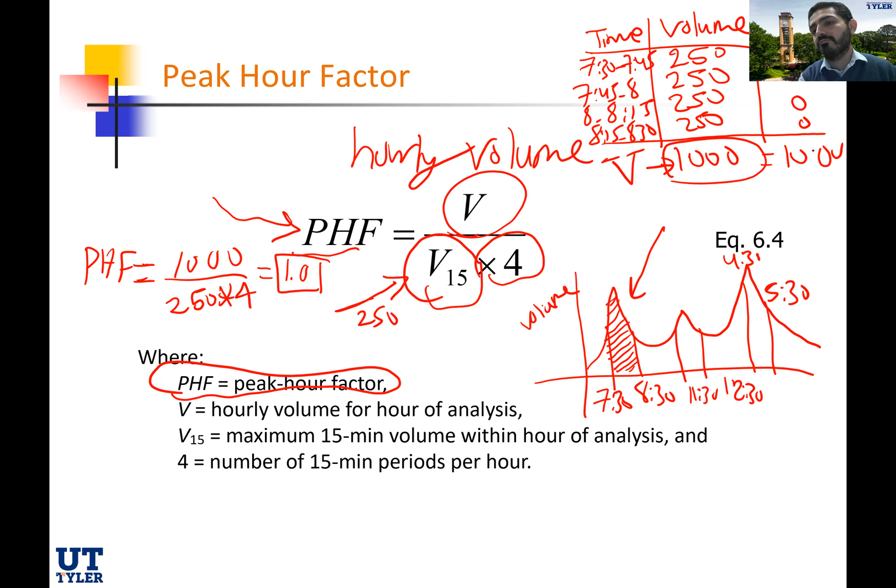The worst case scenario is if I have a volume of 1,000 from 7:30 to 7:45, and then 0, 0, 0. What's the capital V in this case? Still 1,000. So the peak hour factor here: capital V is still 1,000, over V15, the worst 15 minutes, which is also 1,000. So 1,000 over 1,000 times 4 gives me 0.25 - this is the lowest possible peak hour factor you can have.

That's the worst case scenario. A peak hour factor approaching 0.25 means there is really bad signalization, bad planning, that within that bad hour, one 15-minute period is the worst in that hour. So a peak hour factor of 1 is the best case scenario, and a peak hour factor of 0.25 is the worst case scenario - this is really bad, and this is really good.

Typically, in the past 7 years or so, in CENG 4351, we measured the peak hour factor on a couple roadways here in Tyler, and it's about 0.85, which is approaching a very good condition. Thankfully, we're not close to a bad condition where it's 0.25 or even 0.5. It's actually in the higher range, 0.85 or 0.87. That means the traffic within that peak hour is almost uniform.

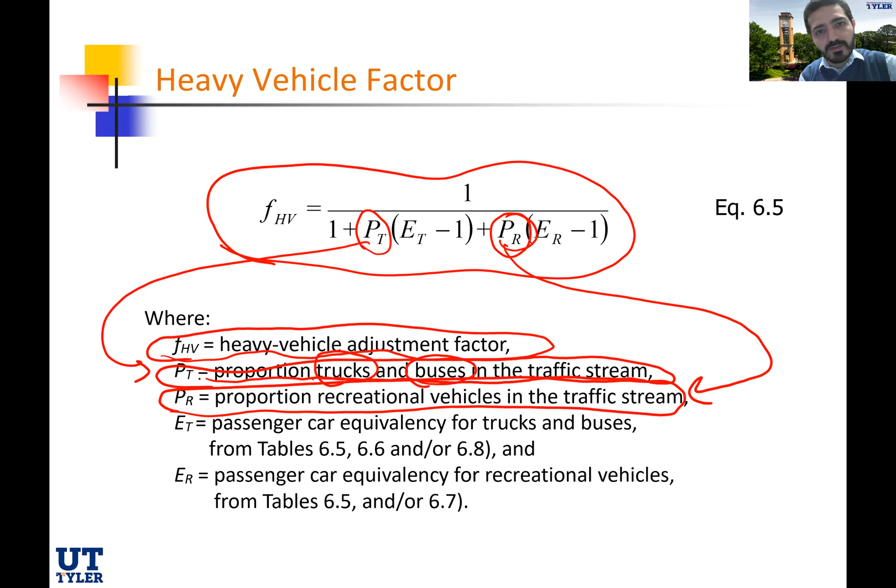So PT, this is the proportion of trucks and buses in the traffic stream. Is it 5%? Is it 10%? Is it 30%? We typically sum up the trucks and buses under the PT. And then the PR is actually the proportion of recreational vehicles in the traffic stream. So if I have RVs, it has its own little portion of that equation.

And then ET and ER, we get these from tables. ET is the passenger car equivalency for trucks and buses, which we get from tables 6.5 or 6.6 or 6.8. And the ER, we get the passenger car equivalency for recreational vehicles, and that is from table 6.5 and or 6.7.

So let's get to those tables and see how they look. The PT and PR, for now, they're going to be given to you in an exam or a homework - the percentage of trucks and buses, or the percentage of RVs. What you need to obtain from the tables is the ET and the ER.

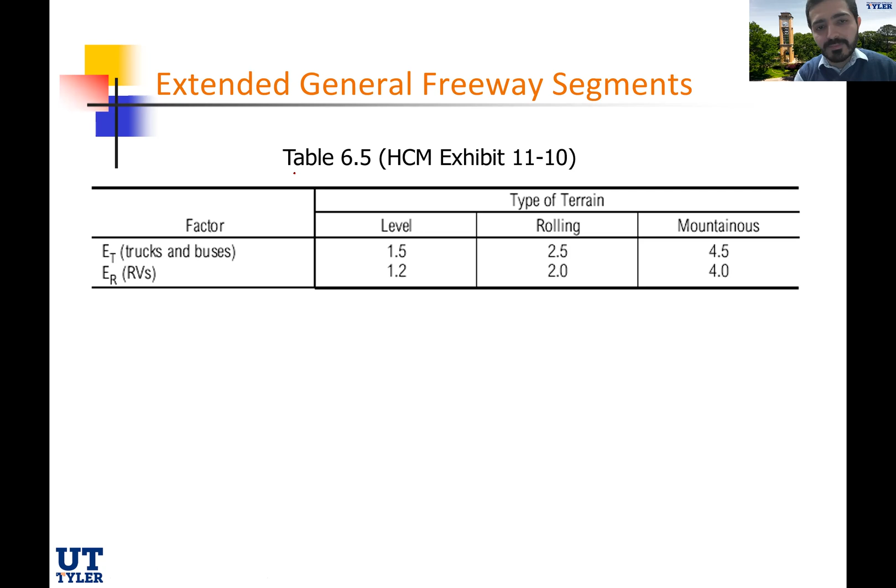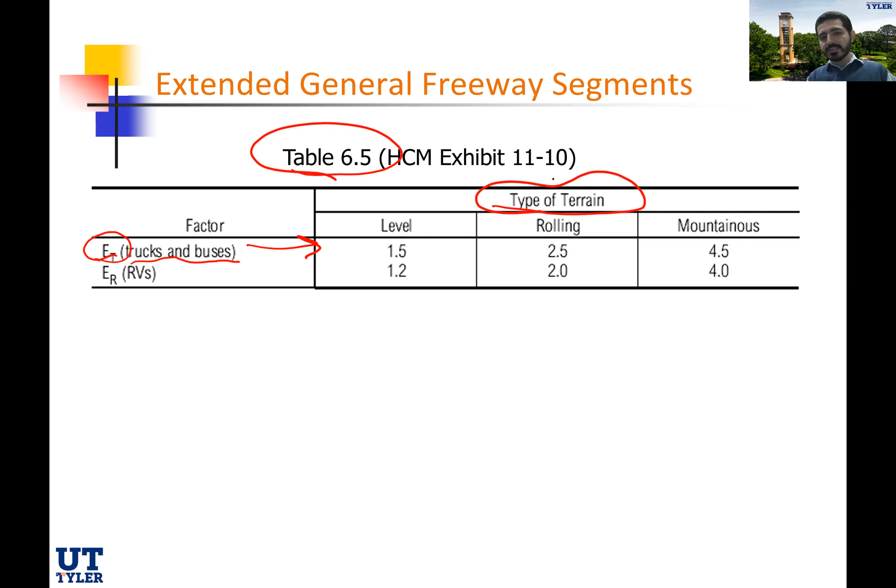So this is the table to get the ET and ER. A simple table, and most of the time we're going to end up using table 6.5 more than anything else. The ET, which is a factor for trucks and buses, it all depends on the type of terrain. Is it a level terrain or rolling terrain or mountainous terrain? Here are the definitions.

I'm going to leave those definitions for you, but really it depends on how the vertical alignment is at this location. If it's less than 2%, that's a level terrain. If it's a rolling terrain, that means any combination of grades or horizontal vertical alignments that causes heavy vehicles to reduce their speed substantially. Or mountainous - this is any combination of grades, horizontal vertical alignments that causes heavy vehicles to operate at crawl speed. These are the three different definitions from the HCM.

So why it differs from 1.5 to 2.5 to 4.5 - the truck factor keeps increasing if I am now going through a mountainous terrain. Because imagine I have a high percentage of trucks and buses, and you're also driving on a mountainous terrain. What's going to happen to the level of service? It's going to plummet. Versus if it's a level terrain, the factor is lower, 1.5 and 1.2. The rolling terrain is somewhere in between.

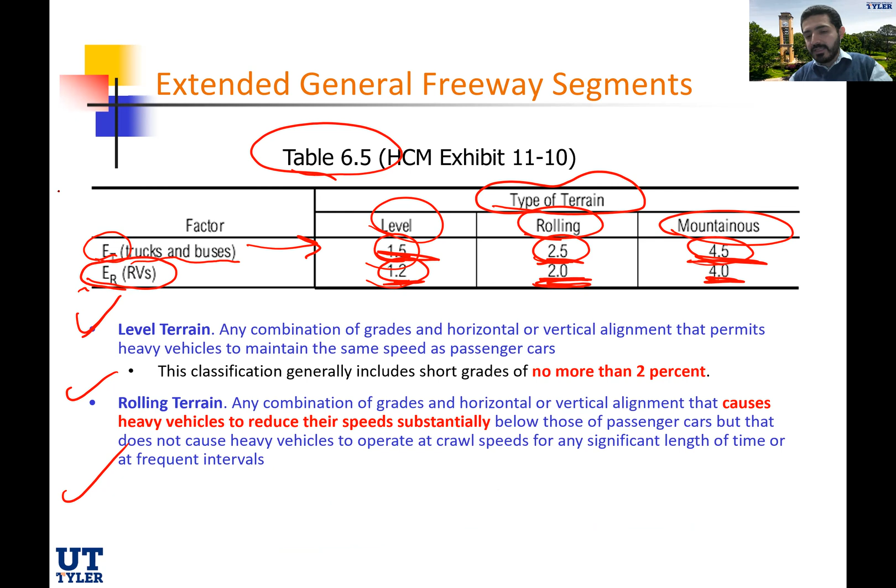For ER, the same thing, which is for RVs, it's 1.2 for level terrain, 2.0 for rolling terrain, and 4.0 for mountainous terrain. Once I get the ET and ER, I go back to the equation for the FHV and get the FHV. Once I have the FHV, I feed it back into the equation one more time. I know the V, I know the N, I know the peak hour factor. The last thing remaining is the FP.

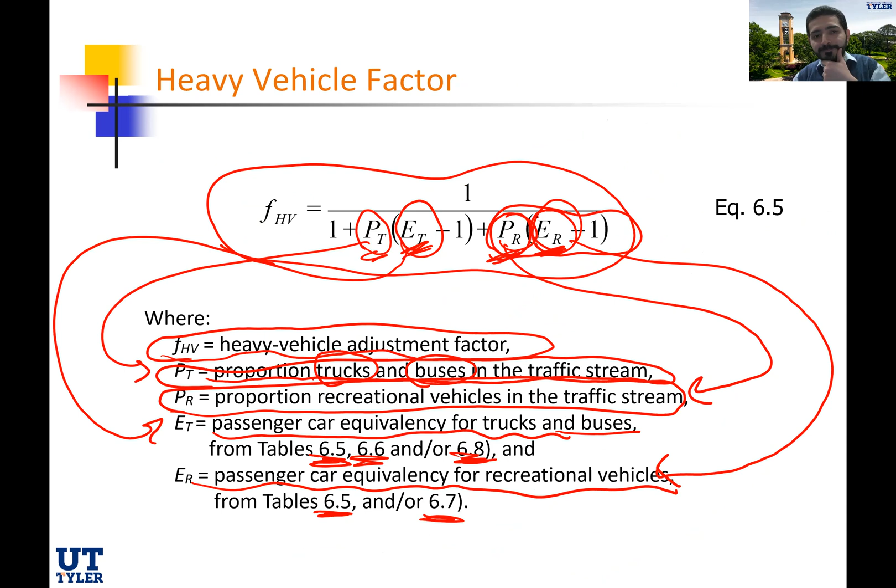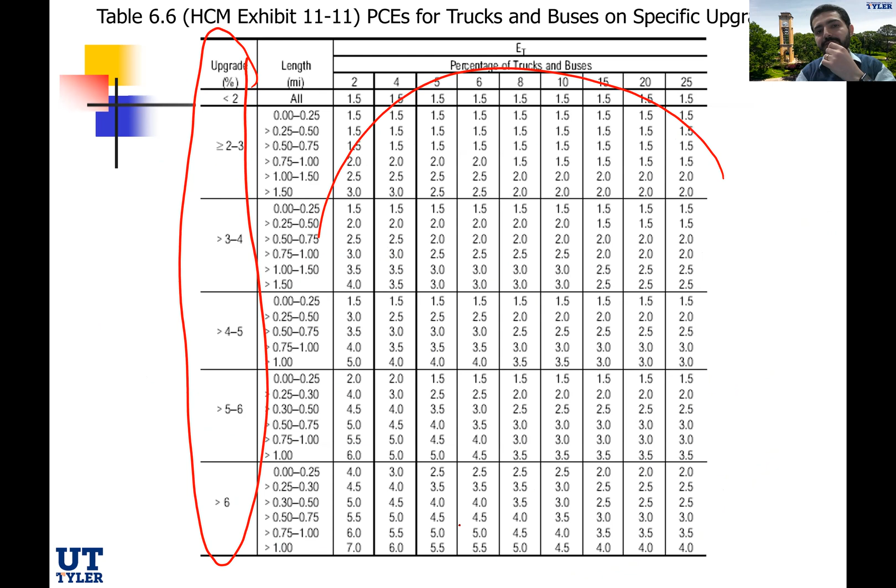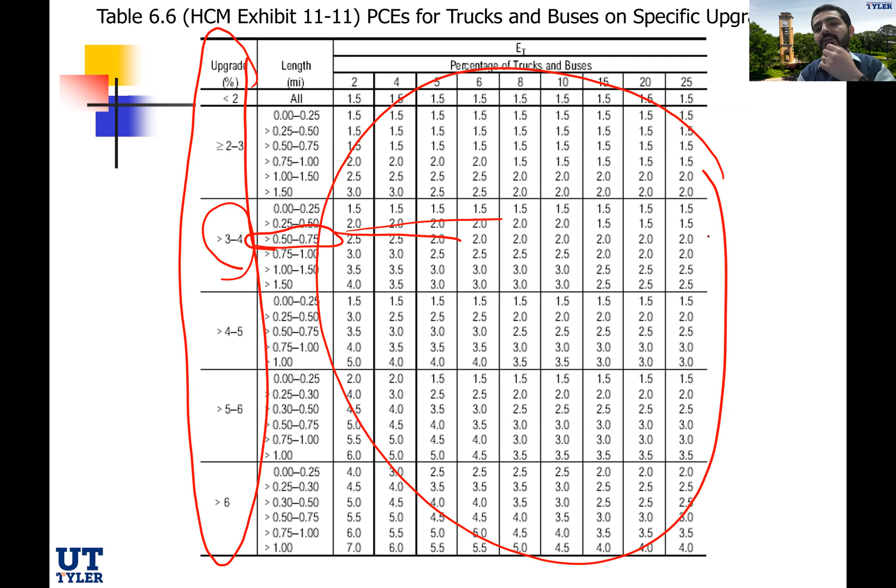So there is another table, a detailed one in case there is more analysis into this location. We're not just interested in whether it's level terrain or rolling terrain. I'm interested now, if you are given the grade, what's the specific grade of this location, and what's the length of that segment of highway. I'll be able to get the specific ET depending on the grade and the length of the highway. You go here and you'll be able to pick based on the percentage of trucks what's the ET specifically. Same thing, table 6.7 for ER.

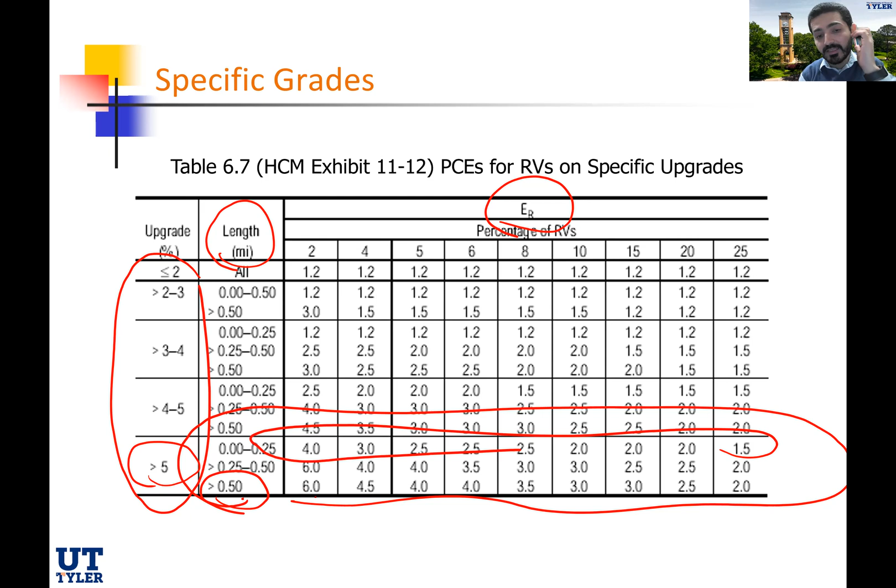If I tell you what's the upgrade, what's the maximum grade, the elevation—I mean the grade—if it's more than 5, the number is going to be always high, and again it depends on the length of that location. If the length of that upgrade location is barely 0.25 miles out of maybe a 2-mile stretch, the impact will be much lower than if I have more than half a mile with high grades.

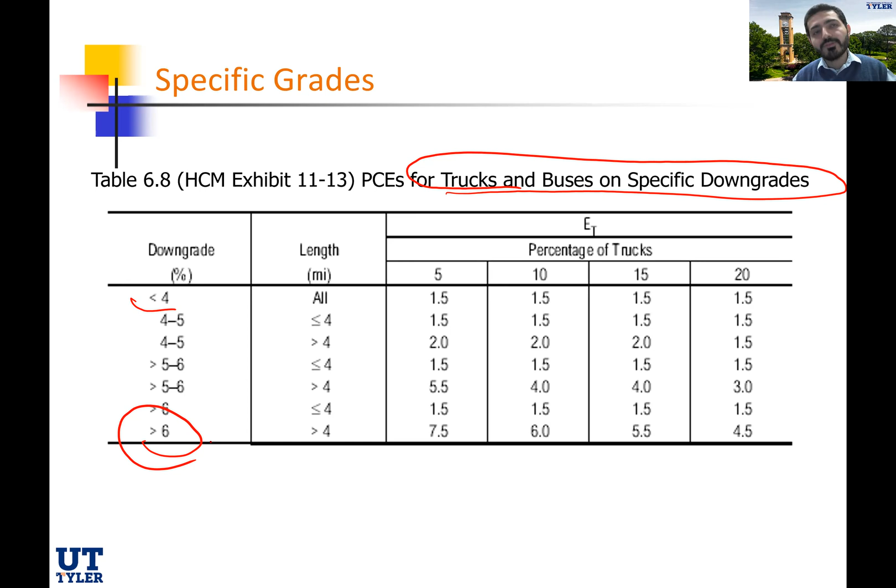Table 6.8 also, again, this is for trucks and buses on specific downgrades. Now it's not upgrades, it's downgrades, because downgrades can also be a very dangerous situation if the downgrade is more than 6%, for example, and the trucks are just rolling down at very high speed. That can create a dangerous situation, and drivers are going to slow their speed and be cautious because of the downgrade, which also lowers the level of service. That's why the factors are way higher if it's more than 6% downgrade compared to less than 4%.

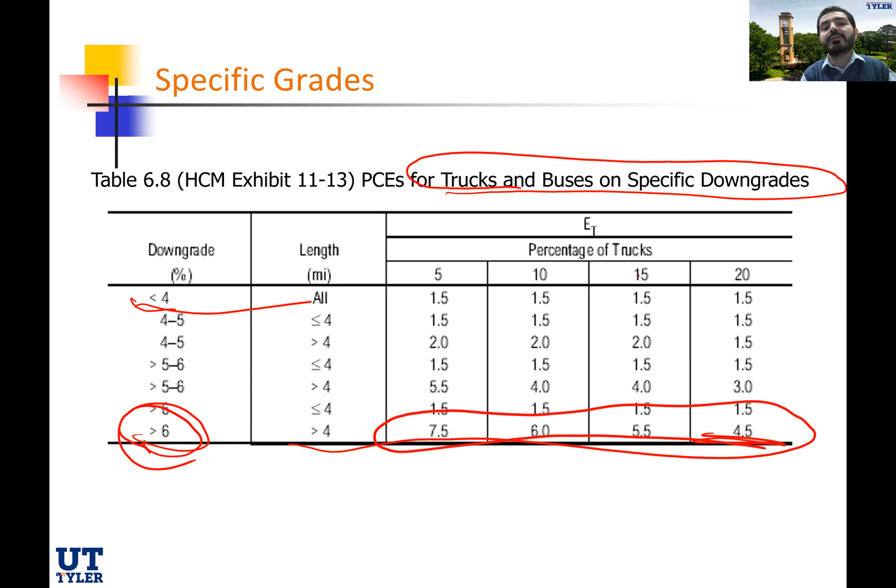Leading us now to the very last factor, which is the FP. FP is the driver population factor. Again, the values of the FP range from 1 to 0.85. In general, you would select FP equal to 1 if I didn't give you any details.

If there is no percentage of unfamiliar drivers given, you're going to assume it's 1, unless I tell you there is sufficient evidence, or it is the analyst's judgment, that a lesser value reflecting more recreational traffic characteristics should be applied—then we can go to maybe 0.9 or 0.85. The lowest is 0.85. So depending on the decision of the engineer, it can be 0.95, 0.9, or 0.85. Those are the numbers.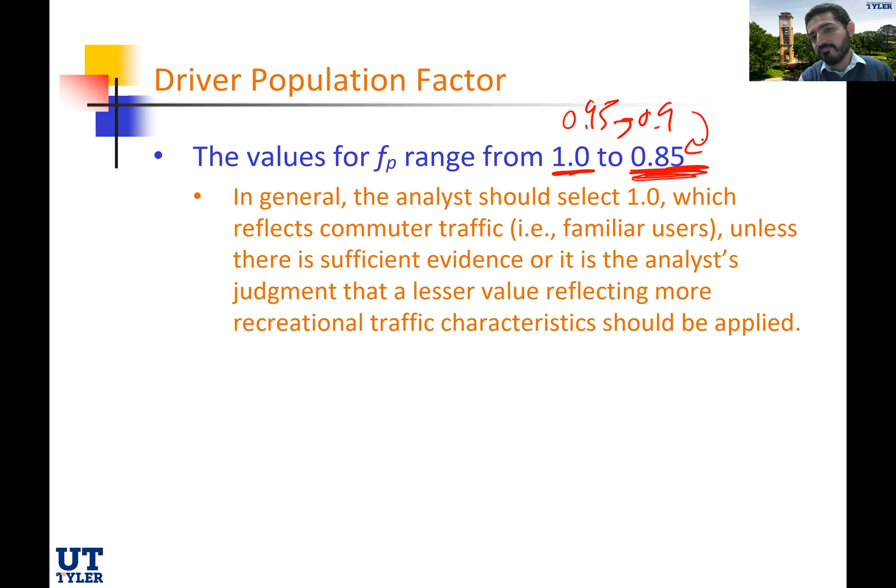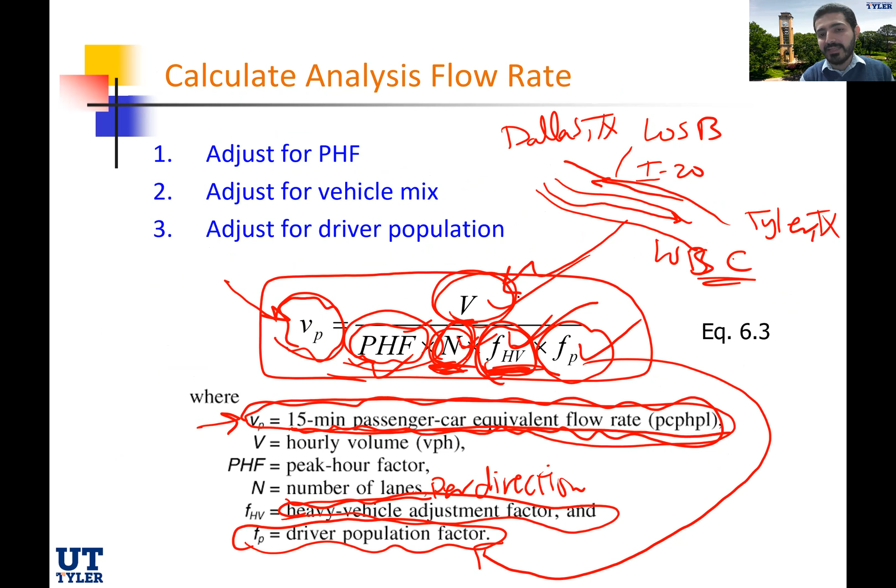All right, so once we have the FP, back to here: I have the FP, I have the FHV, I have the N, I have the peak hour factor, I have the total volume, so I get the VP. What's the VP and why do I need it? Let's go all the way back. I need the VP in the third stage, to get the flow. And if I know the flow and the free flow speed, if I know the speed and the flow, what can I get? The density—that's the very last step here.

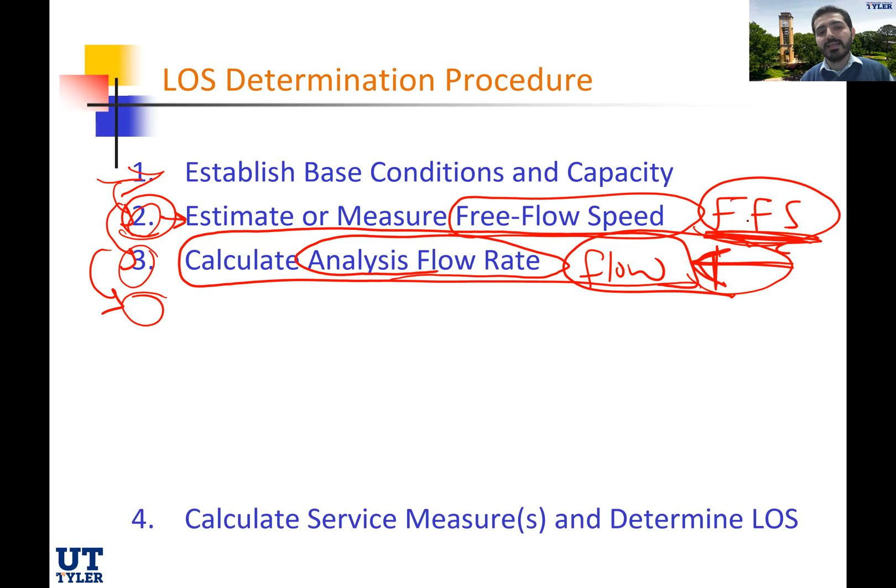So moving forward, as you see here, this is the density. This is the equation that we derived from the previous chapter. Density, which is passenger cars per mile per lane, is actually the flow over the speed.

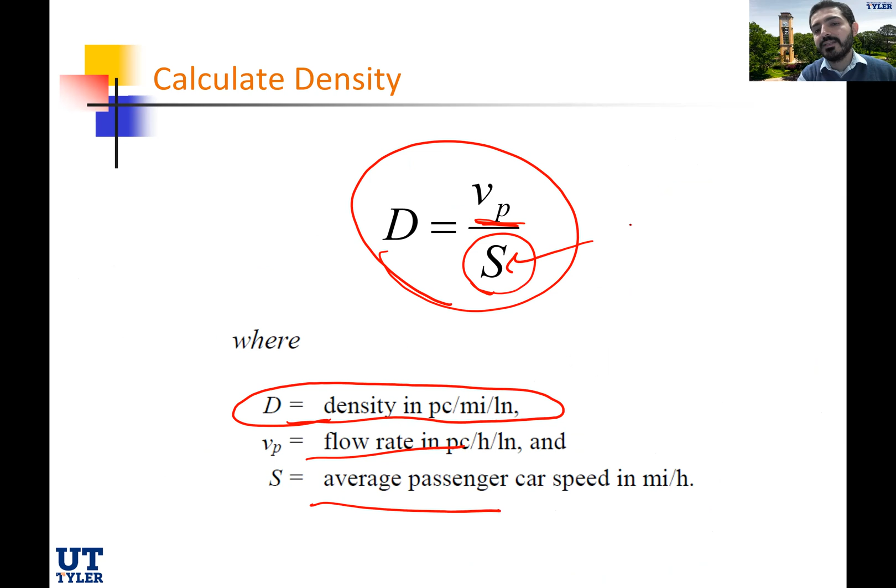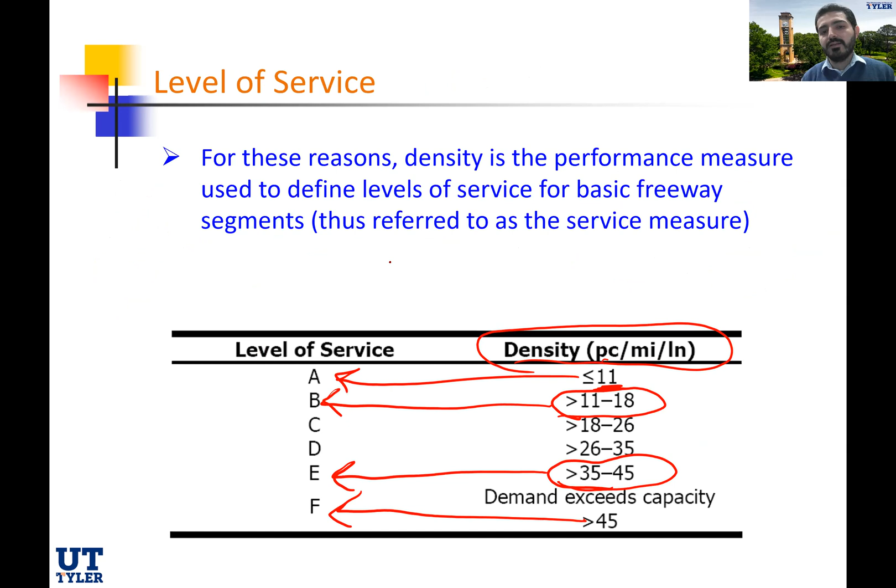So once you get the VP over S, or the speed here, or the FFS, actually this is the free flow speed, you'll be able to get the density. Once you get the density, you can go back to the table all the way up front to determine what is the level of service.

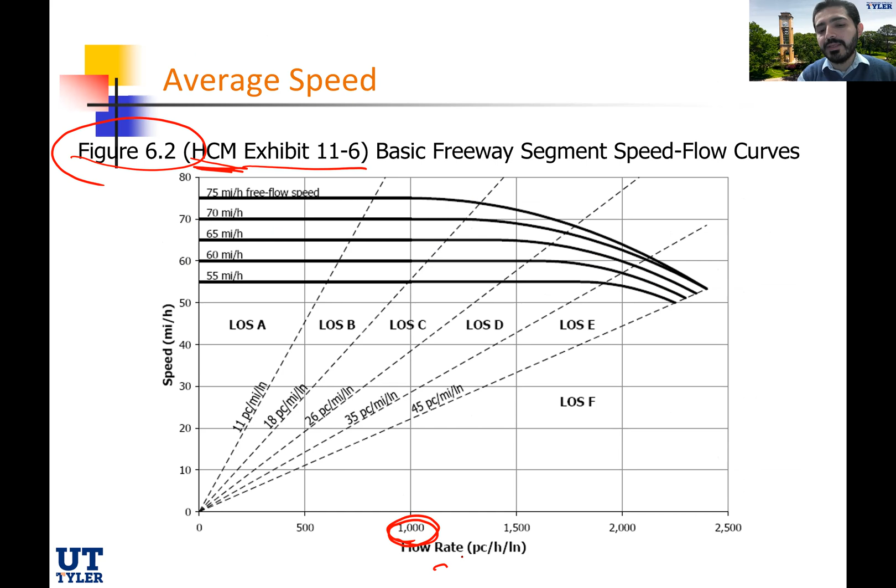A more famous figure here that we use is this one, figure 6.2 from the Highway Capacity Manual, exhibit 11-6. This is the basic freeway segment speed-flow curves. If you have a flow rate of 1,000, flow rate again is the VP, the capital V over the peak hour factor times N times the FHV times the FP.

Once you get that, this is your x-axis. The y-axis is the FFS. So if you know the FFS and the VP, let's say the VP is 1,000 and the free flow speed is 66, you're going to draw a horizontal line here, and a vertical line at 1,000, and that point is basically the level of service B.

Anything from this line to this line is level of service B. Anything in this area from the beginning all the way to this line is level of service A, and so on. This is level of service C, level of service D, level of service E.

Or instead of looking at the area, you can divide the two together to get the density. If it's 1,000 over 66, the density in this case will be equal to 15.15.

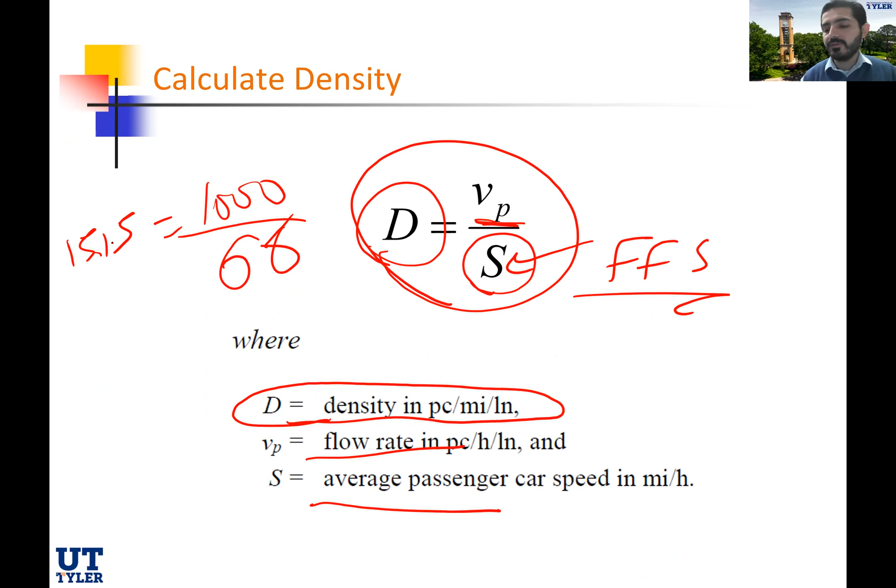Same thing, see the numbers here. This is 11 passenger cars per mile per lane. So anything at 11 or lower is level of service A. This line defines 11 passenger cars per mile per lane or lower as level of service A. Anything between 11 and 18 is level of service B, and ours was 15.15, sitting at this point, and that's why it's level of service B.

How about if the flow rate is 2,000, double, and the free flow speed is 60? I'm going to draw a horizontal line here, and 2,000 vertically, it's going to be right here. It's actually between these two lines, and that is a level of service D.

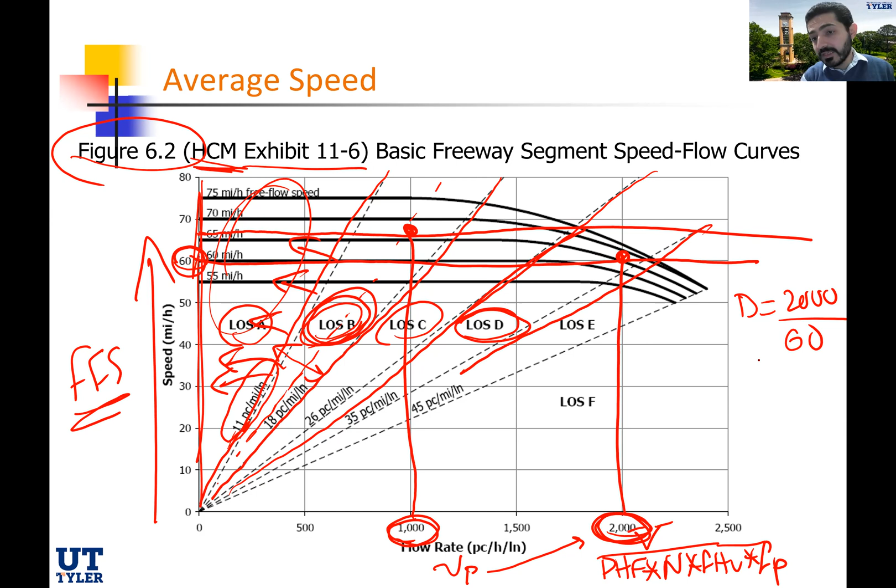Or same thing if you want to do the density calculation. The density is equal to 2,000 over 60, which is 33.33 passenger cars per mile per lane. This is 26, this is 35, so between these two lines, that also leads us to level of service D. So this is the most famous figure here to get the level of service for freeways.

There is another table, table 6.1, to also give you the same thing. You have the criteria: what's the maximum density, what's the average speed, what's the maximum V over C, what's the flow rate, to get us the level of service. For example, the first part here is flow FFS, free flow speed 75 miles per hour. If you know your numbers, you'll be able to justify if it's level of service A, B, or C.

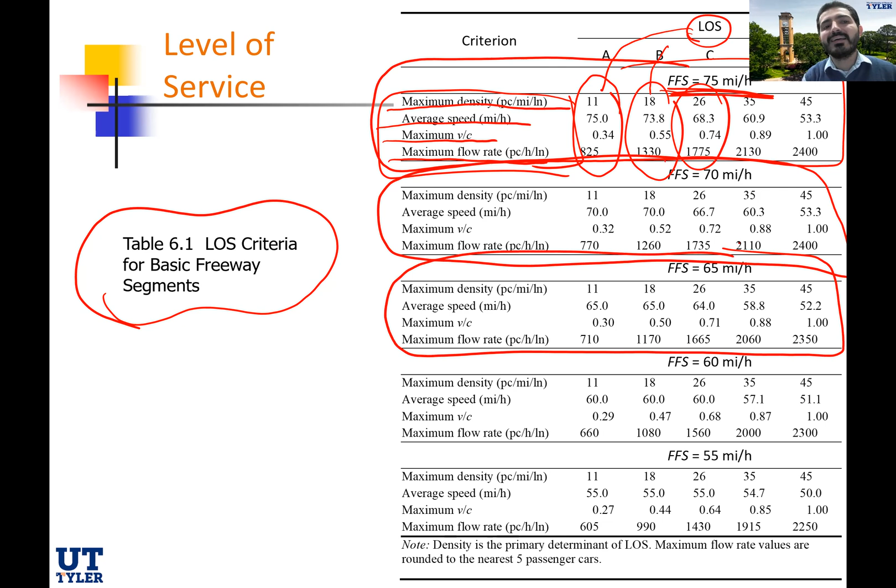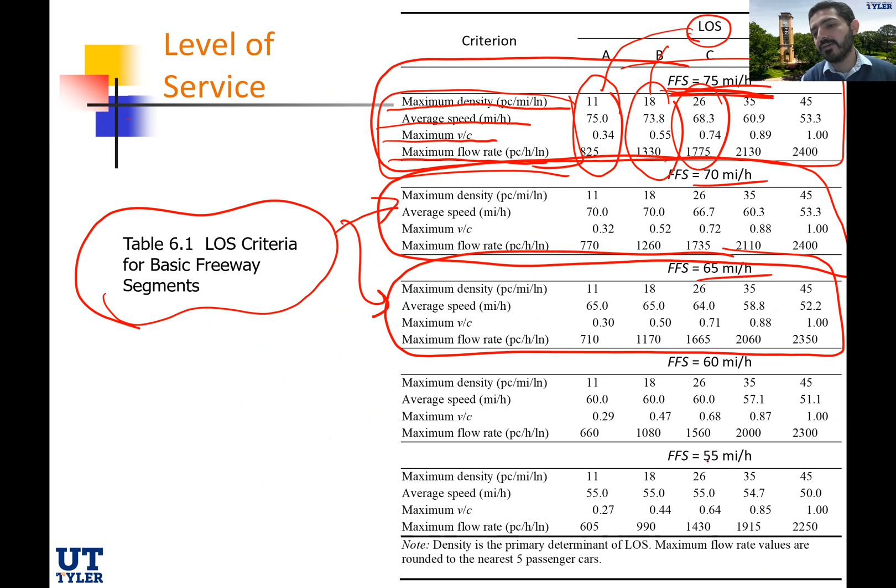If the free flow speed is 70, you do it here. If the free flow speed is 65, you do it here. But how about if the free flow speed is 67? You need to do two calculations and then interpolate. That's why most engineers like to use this graph instead, because it gives continuous readings between 0 all the way to 80, instead of discrete numbers like 75, 70, or 65 all the way down to 55.

So with that, we finish the first segment of this chapter, where we defined the level of service and now know how to calculate the level of service for freeways.